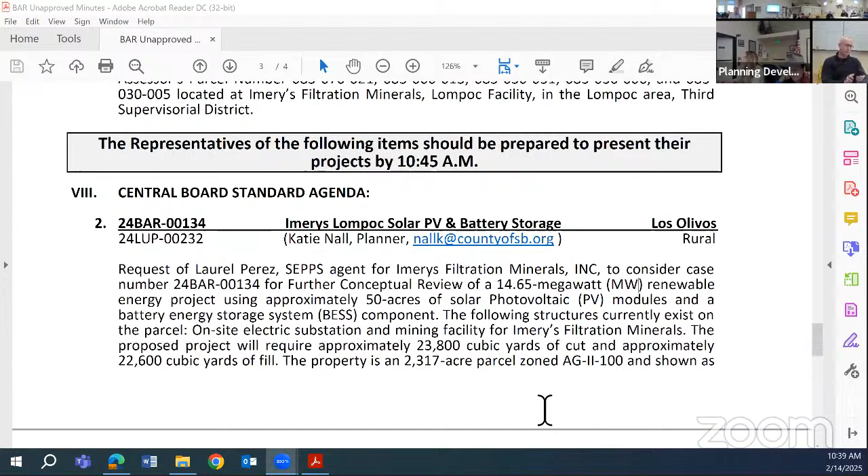Do we have any member of the public who wishes to address the board regarding an item that is not on today's agenda? Not seeing any public comment, and no public comment online.

Okay, any recusals today?

Agenda status report: there was a little change on the agenda for item number 1, which was the site visit, item number 2. It's listed as Los Olivos, and it should be corrected as Lompoc, so make that correction.

Madam Chair, would you announce why we're late? Most of us have been here since 9 o'clock trying to get these meetings going. The site visit was our first item on the agenda, at 9 a.m. We're convening here now because we've just returned to the hearing room, and the first item is also the same as our site visit, which is time certain for 10:45. So that's why we're doing it this way.

Did we need to massage the order of any of the items? Oh yes, we did have a request for item number 4 to be heard before 12 p.m. or after 1 p.m. They have a conflict, so they would like to be heard before or after 1.

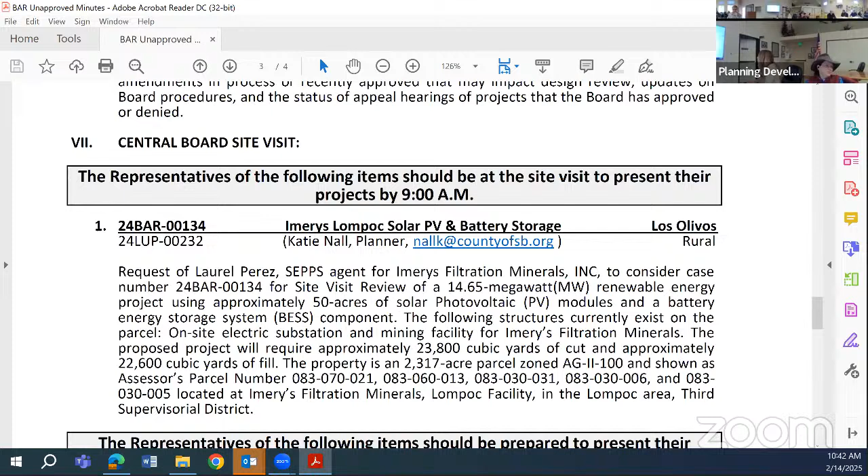Okay, that's my nag. All right, so staff update, do we have anything, staff?

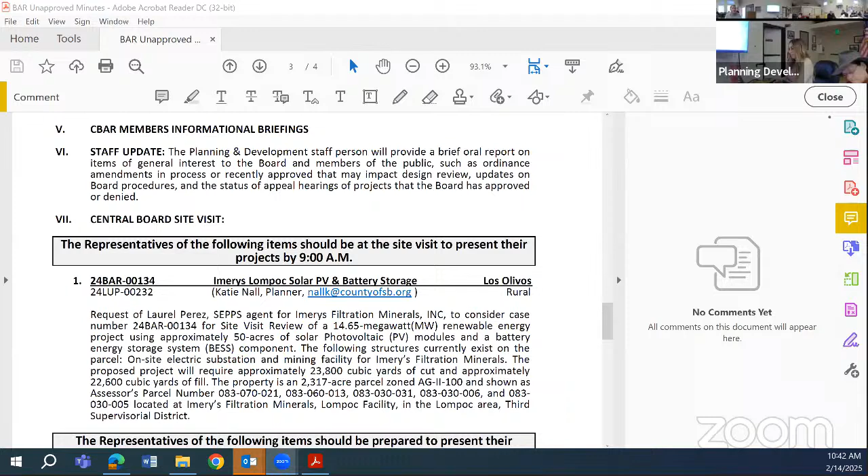Good morning, this is Chris, I am subbing in for Nicole today. Happy Valentine's Day, everyone. The only update I have is that a project was recently heard at the zoning administrator. It was the Seaside Residence and Habitat Restoration Project in Gaviota. I wanted to bring that to your attention since it was a project that came before CBAR, and it is likely to get appealed, which would send it to the Planning Commission. That's it.

Okey dokey. All right, well, I'm gonna very slowly call the next 2 items. Our site visit, which was item number 1, 24-00134, Imerys Lompoc Solar PV and Battery Storage. We did make that site visit, and we actually had 2 members of the public. It was nice.

So that leads us to, very slowly, item number 2, 24-00134, Imerys Lompoc Solar PV and Battery Storage. Do we have anybody online for this? I don't want to call it early, I know it's only 2 minutes, but I don't want to get ahead of ourselves. I think Sally Isaacson may be online, she was at the site. Yes. There she is, okay.

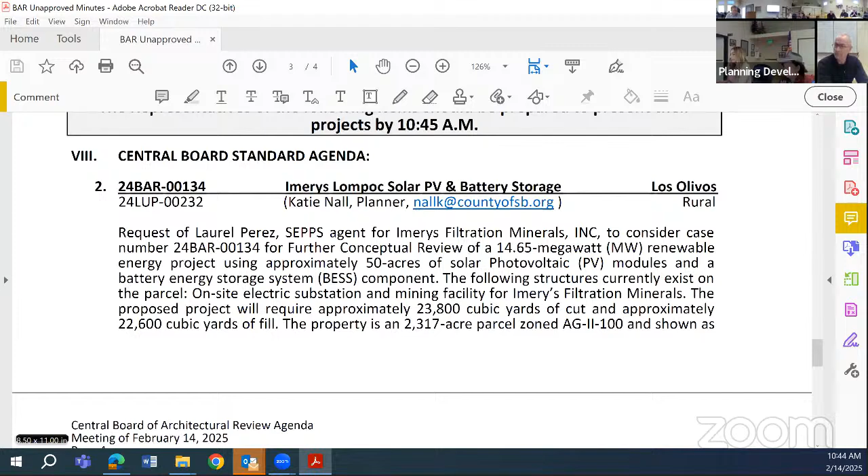I'm gonna go ahead and read, start on the comments, which I'll do first. I don't believe our planner is attending online. So the next thing we're gonna do is I will turn it over to the applicant to have him step up here to the lectern, and we will go through your proposal, your presentation, and then at that point we will see if there's any questions of clarification from the board. After that we'll do public comment, and after that we will go ahead and come back for the board's comments.

Okay, so from last time: this area is a gateway to Lompoc and is an important historic visual scenic corridor. The project site alternatives analysis is difficult to read and lacks detail. Provide a more detailed alternatives analysis that identifies why certain areas are excluded. Create a comprehensive and detailed constraints analysis exhibit, including areas of abandoned mining that could be used for the panels, such as prime solar collection, slopes, sensitive resources, etc. Look at whether there's an opportunity to split the panel location into multiple locations in order to limit the visual impact.

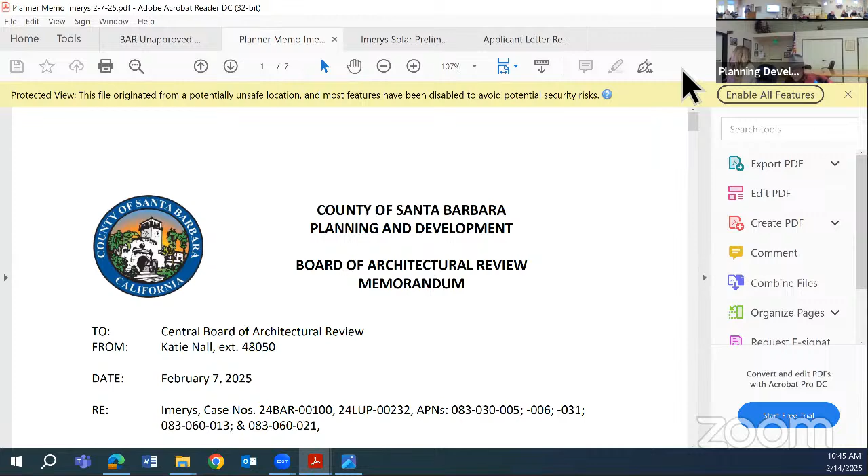It would be best not to place the panels on the highest knoll. A site visit will be necessary for the project. It is anticipated that additional visual simulations will be required.

Provide more details on vegetation that is being removed and vegetation that is proposed to be planted. The history and context of the site, as well as potential restoration areas, should be considered when determining plant selections. Clearly show existing and proposed vegetation and uses.

Strong concern about the poles going over the hillside. Please consider undergrounding the line. Concerned about the chain link fence and how that will integrate with the agrarian nature of the area. There could be more agrarian style fencing that's more appropriate.

Please do not use a V-ditch anywhere on the solar panel sites. We support the replacement of existing vegetation below the panels rather than use of gravel or other material. We are concerned about glare and reflectivity. Please provide more information on how this is being handled, particularly with respect to the view from the road. This item will return for further conceptual review.

We've completed the site visit this morning, so we've got the plans up on the screen. Let's go ahead and take a look.

I'd just like to start off by thanking the board for your time and coming out to visit the site with us. We had prepared a letter response to each of the comments, and as the chair went through and read off the comments, we have little summary responses to each of those. So for the first one, the project is in an area that's a gateway to Lompoc, an important historic visual scenic corridor.

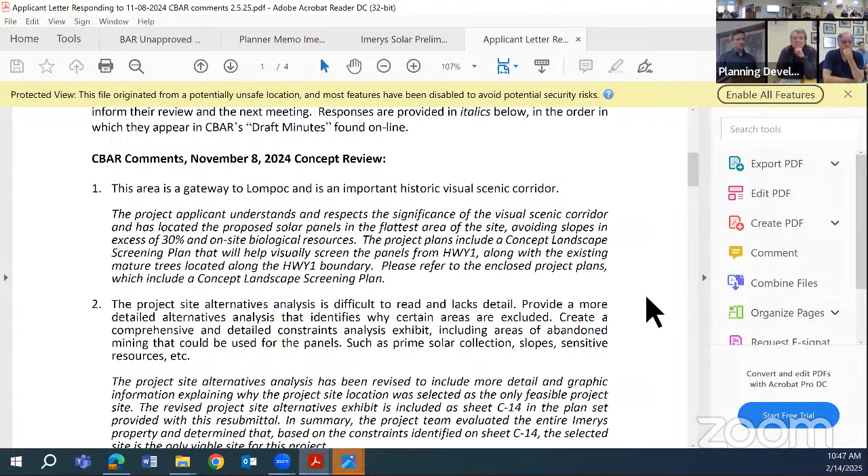The applicant acknowledges the historical significance and the visual scenic corridor. In the layout of the project, we're attempting to get the solar panels down in areas to limit the visual impact as much as we could, and also with the combination of a concept landscape screening plan, hoping to further mitigate those visual impacts. And we'll get to a point where we can take a look at that concept landscape screening plan.

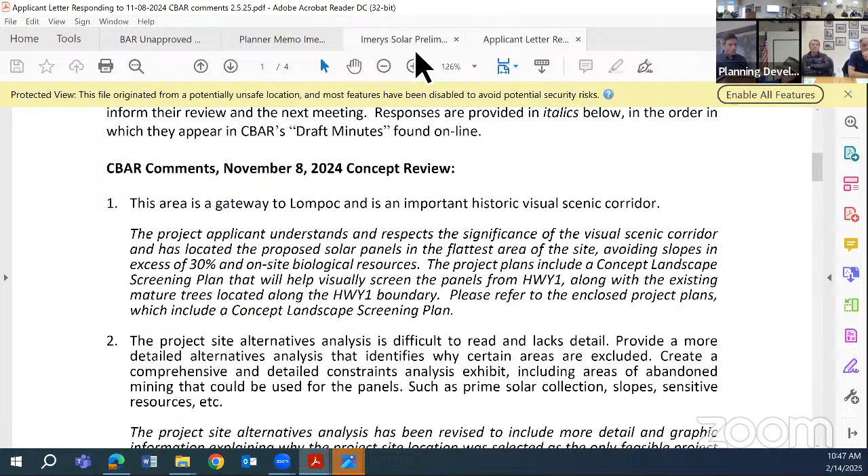Is it possible for you to go through the plans and tell us this information as we're looking at the plans? Sure, yeah, I think that would be a little more efficient.

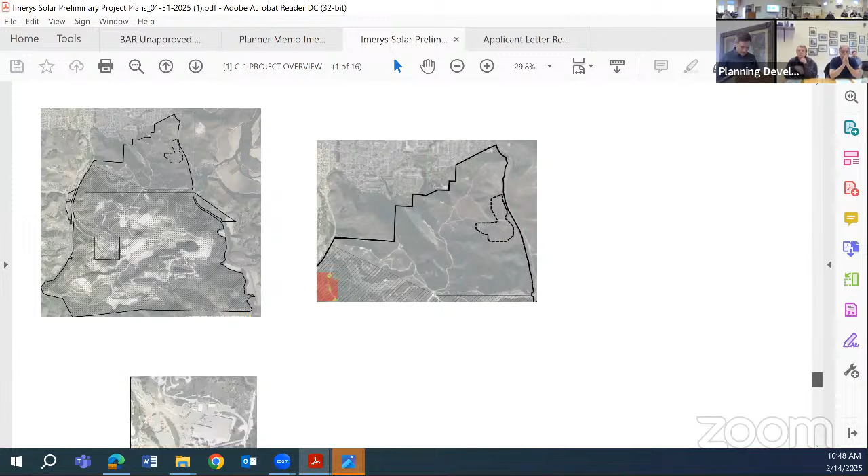Okay, so the concept landscape screening plan, I believe, is the second to last page in the sheet set. It's sheet C15. This is something that we put together to address some concerns over the visual impact and also to address some of the vegetation that's being planted.

So on the bottom of the sheet is east. On the eastern edge of the site that borders the highway, we are planning on planting a combination of trees and shrubs in locations that we feel would provide some mitigation to that visual impact. The trees and shrubs are intended to be of native variety.

We do have a plant palette, just example plants, on the next sheet, so you can see some of the things that were considered for that. In the upper right-hand corner are the items for screening, and some of the trees there.

We have other types of plants shown on here that would be intended to be used for other purposes, such as biological restoration and erosion control, down on the lower left. The erosion control would primarily be used anywhere the site needs to be disturbed or graded for the installation of panels.

So back to the comment about not putting gravel underneath the panels, the intent was not to do that. It was to revegetate with a native plant seed mix.

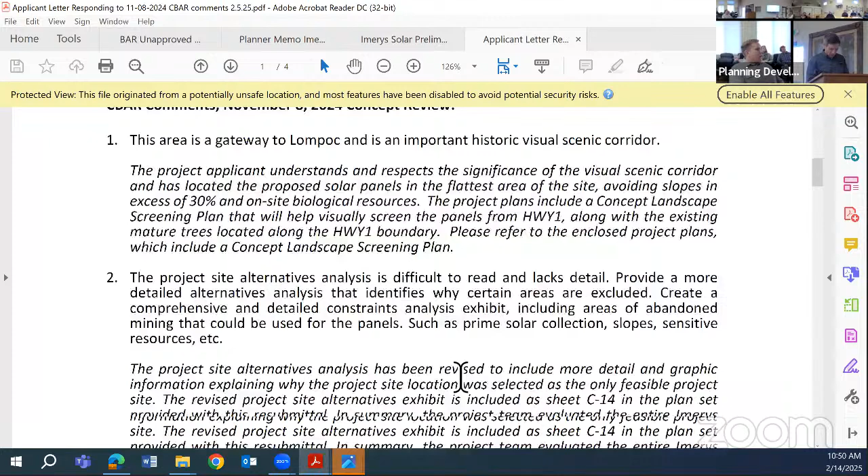Moving on to the second comment, about the project site alternatives analysis being difficult to read and understand. We revamped that a little bit and actually put it as a sheet in this plan set. If you want to look at that, I think that was sheet C14, right here.

So what we were trying to convey with this sheet was to demonstrate that even though Imerys owns a pretty large area of land, most of it is unavailable for this project due to existing mining uses. There was some consideration of putting rooftop solar and carports down in the main operational area; however, you just don't achieve the same scale to make it work economically.

So that sort of put us in the northern third of the project area, which, if you look, there are some blow-ups there, and the colorized pattern is a heat map of slopes.

The desired project site is on the right-hand side of that blow-up. Green colors are the lower slopes, yellow is getting steeper, and red represents areas of 30% slope or higher, where development really shouldn't occur. Most of the land is that red, orange, steep slope area not conducive to development or solar. The lower right-hand image is a blow-up of the solar site, further demonstrating that once you consider biological constraints and setbacks from riparian zones, we're locked into that area we were looking at.

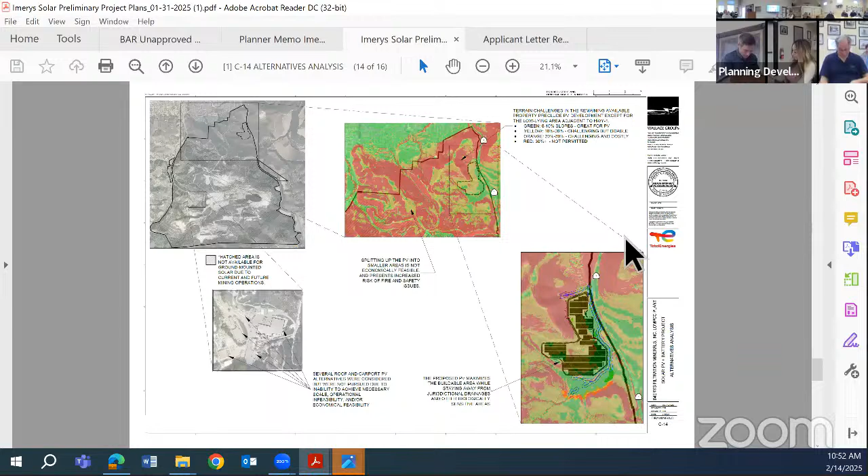Item 4: it would be best not to place panels on the highest knoll. To respond to this, I did a street view screenshot with the extent of the project disturbance area overlaid with a red line, to demonstrate that we weren't planning on putting panels on the highest knoll. It does extend up the hillside a bit, as we saw this morning, but definitely not on the highest knolls - lower area. A site visit will be necessary, and additional visual simulations are anticipated. We accomplished the site visit this morning, thank you again for that, and we'll accept any feedback on the visual simulations we need to see.

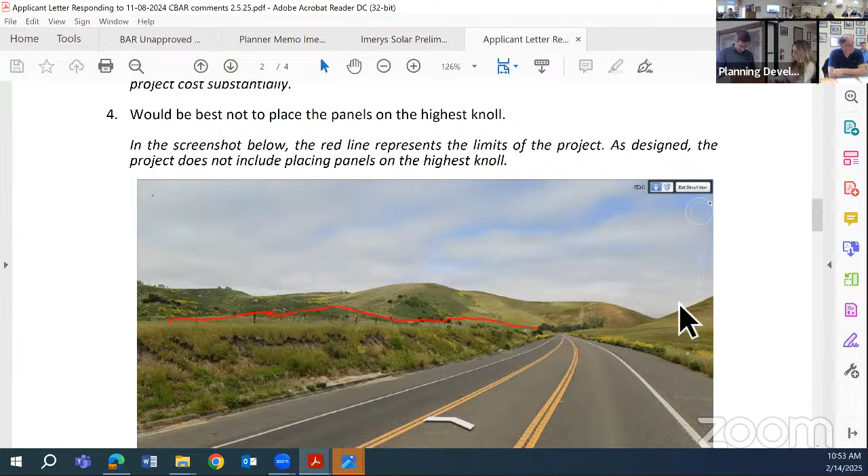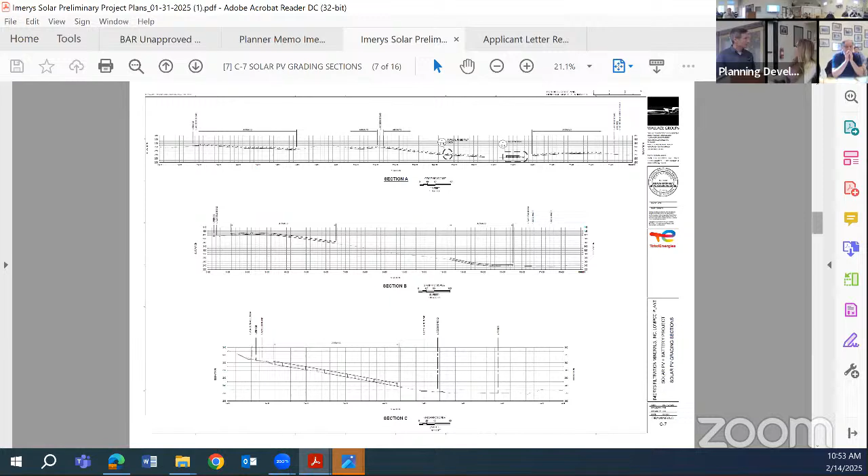Comment 6: provide more details on vegetation being removed and vegetation proposed to be planted. If you flip to the plans, back on C3 earlier in the set, I updated that tree removal plan because the prior iteration had missed an area of eucalyptus trees that we were planning to remove. I updated this layout to reflect all of the trees anticipated to be removed. This addresses trees, but doesn't address some of the shrub and grassland that will be disturbed and removed for installation of the panels. As you look up that hillside, the scrub brush where panels will be installed would be stripped down to install them, then revegetated with a local or native seed mix.

Comment number 7: strong concern about poles going over the hillside, consider undergrounding the line. The intent of the gen tie line was to use overhead conventional wood power poles, not the big steel poles being used elsewhere on the property for PG&E and Strauss. Our proposal is still to stick with the overhead lines. We think the visual impact of those wood poles won't be as significant, and there are also some risks associated with undergrounding - trenching up through the hillsides introduces biological impacts we would need to consider.

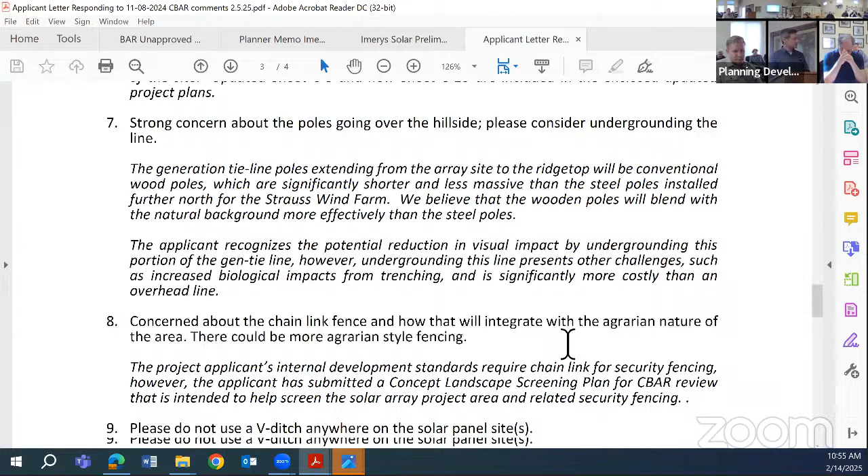The next comment concerned the chain link fence and how that would integrate with the agrarian nature of the site. The developer has some standards as far as how to protect their sites, so the chain link fence is something we're not really able to get away from, but we're thinking that with the screening plan, some of the proposed vegetation would mitigate some of the visual impacts from a chain link perimeter security fence.

Regarding the comment about V ditches - yes, we weren't planning on using any concrete V ditches for drainage. And we support replacing the vegetation below the panels rather than gravel. I addressed that; we are planning to revegetate with native low-growing vegetation.

Then, concerns about glare and reflectivity. We did a glare study in accordance with what is typically done on FAA projects and found that the glare is fairly minimal. Given that it's focused mostly on the panels themselves, we do recognize there is some potential for glare from the metal racking systems. The material typically used for that equipment is galvanized steel, which can tend to become more dull over time as it ages.

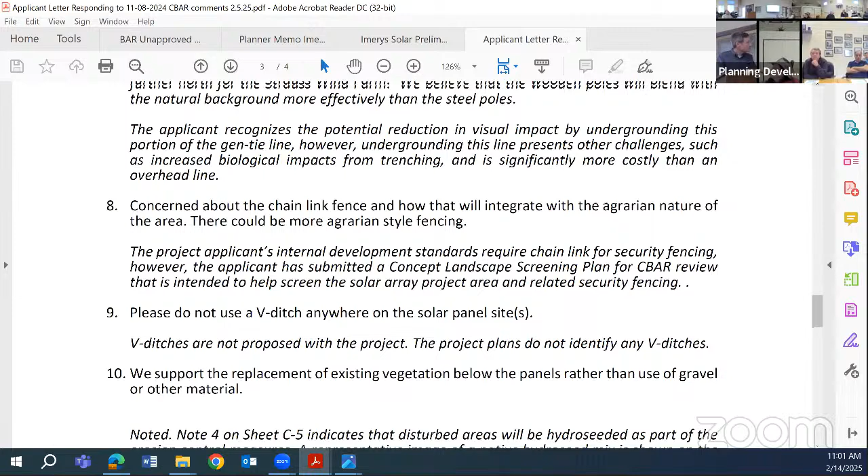Right, so I don't think your landscape plan's going to deal with what we see from the top of that little knoll there too, the red line. Is there any opportunity to add additional screening in the array of panels that would help mitigate further up the hill? There could be, and yeah, I agree that those panels up there, sort of the uppermost portion of that red line, are fairly high elevation, so just planting trees down lower isn't necessarily going to help mitigate all of the visual impact there.

We can look at planting additional trees maybe along this portion of the highway, which I think is a little bit further south from the site, but we can take another look at that. I think planting trees within the arrays themselves, though there may be some opportunity, since we're not putting arrays everywhere, does introduce some concerns with shading. So you can't get trees too close to them, but there could be some opportunities to expand the planting to help address some of those issues.

Yeah, 'cause this is only part of the site. Correct, you have the berm from the road side. Yeah, the berm is blocked further north—there is no berm, so. Agreed, yeah, and as you move further north on the road in street view, it kind of opens up and you can see more of the low lying elevations. Yeah, and that's where we were focusing a lot of the planting, where the berm kind of drops away, so we're concentrating our screening efforts there.

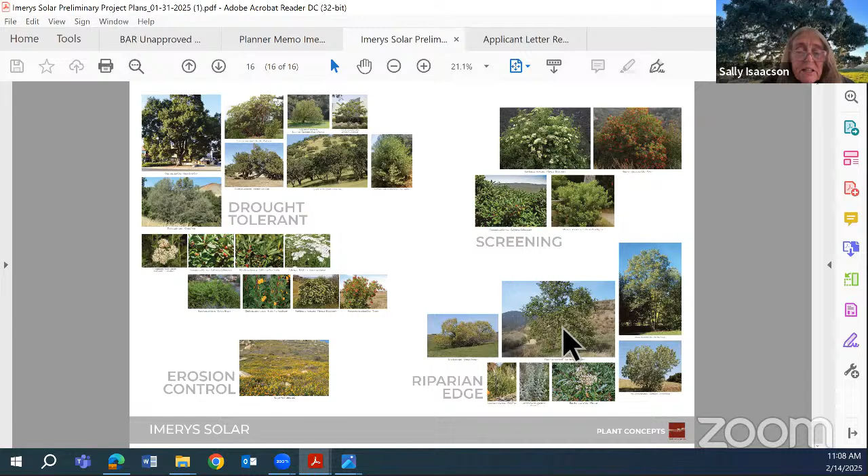But the main thing is we really do not want any visual intrusions along the scenic highway, and the scenic highway starts at 101 and ends at 246. We feel that since the property is over 2,000 acres, and you guys are used to driving big machines and probably own lots of big machines, there must be a way of making some of the topography suitable. A lot of the mine has already been torn up, Miguelito Canyon is already torn up. So why does it have to go along the scenic highway? You can't keep the whole place open just because you might mine it in the next 100 years.

Anyway, so that's a random selection of comments, but the main problem is siting this type of visual intrusion along the scenic highway. Thank you.

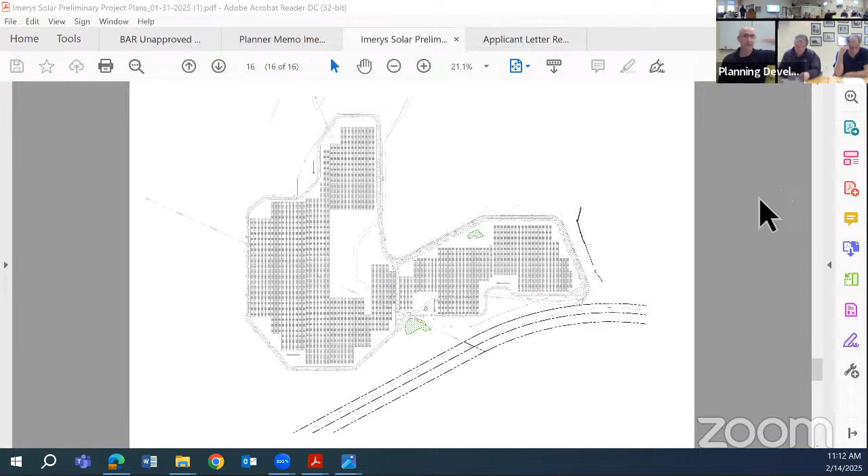And my third and final comment is, I would at least quadruple the trees, at least. I don't want to talk about the height of it, well, I'm sure one of my other colleagues will talk about how high it goes up. If it was cut halfway down, I think you would have a better chance of moving forward. Thank you.

Next? I think I've made my comments on the landscape, I think more is more is better, but I need to understand the point is more appropriate, and by more appropriate, you mean something for the area, more endemic to the area? Yes, good word, okay.

So keep with the native, but just look at things that are more specific to that area, that are gonna work. That was a good catch of Sally's, the gray pine, she's absolutely spot on about that. The madrone would also fall into that category.

And then you'll just have to keep going through the list, but yeah, I think as far as the landscape, there's a real big challenge. Usually when we're dealing with a building, we say the building has to stand on its own visually, it has to meet all of our requirements and findings, because landscape dies. And once it's gone, what are we left with? We're left with this structure, whatever it is.

And so then we start getting into color and breaking up your massing, and a lot of those are, the panels come as the panels come. So when we are facing a project like this where we can't adjust color, we can't do those kinds of things, it makes your job a lot more difficult, but it makes ours a lot more difficult too, because trying to find that nexus point where everything works, that nexus is a lot smaller.

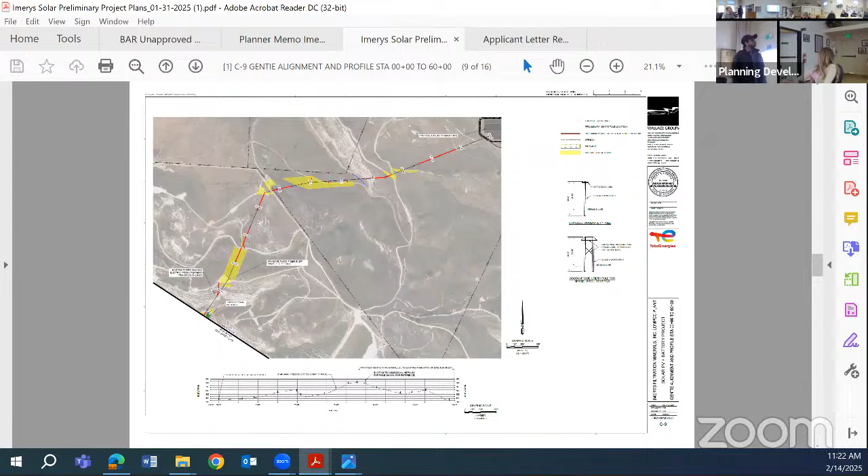And I was pleasantly surprised that when you're at the top where it flattens out again, yes, you get that angle of repose. But there's that band from contour 325 to 355 maybe, where it kind of swoops around there, in between the top flatter part and the lower parts. Just about where the cursor is, but to the left, and down, down to left, down, that band there.

I think it'd be appreciated and go a long way if you could study that with a little bit more scrutiny. Maybe even it's a 2-for-1 where you find a new home for a select number of panels there and replace it with some more screening for the upper ones or something. Whatever you can do there would be appreciated. Okay, take a look at it.

So, yeah, don't limit yourself to just perimeter screening. Take a hard look at where you can put things within the site, specifically that center area, kind of where that red... We're not planning on putting arrays there. Where you're not gonna be putting arrays, right, you may be able to get some shrubs in there or something else that will visually screen from a southern view or even a north view.

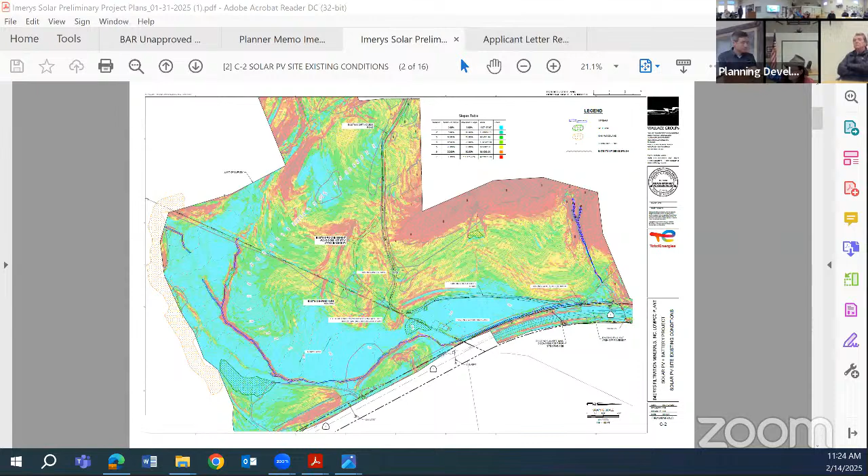But those are the two things. And I think you can see the northern end, where it's up on that slope. I think you can see that from further down one, down towards where the double lane is, passing lane. I think you can see it crowns up above, and it's probably not as visible from Santa Rosa, but on one, that's more visible from a distance. Oh yeah, so you're heading from the south to the north. Northbound, yeah. Because the hill on the south side here doesn't— it's this area, this is just peeking up a lot.

But you get a straight on view, which is very important to us. I mean, granted, most of the cars driving on our roads today, most often, or a high portion of the time, you have the driver who really, let's face it, is trying to focus on the road. But if you put a solar array right in front of me as I'm looking down the road, I'm gonna see it and I'm gonna notice it. And that is a very big view. Not to say that we don't discount those poor sods whose partner always drives and they have to look out the window, right, so we have those as well. So we are looking at— we do look at views and distance is a factor, but so is angle. So those are all things we're gonna be taking into account when I look at it. And I noticed that there was a view of that area.

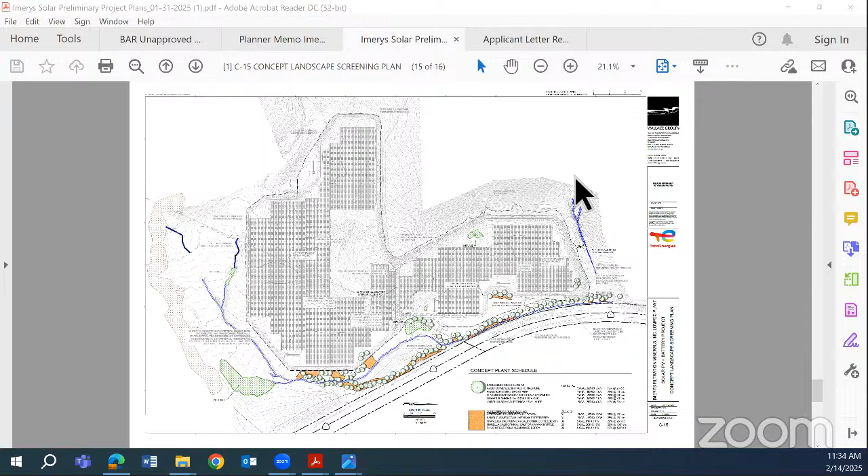Okay, good, does that work? Does that work for you, Katie? Yeah, I'm on board with that. So we'll lock down the consultants, kind of bring them up to speed, come back for another conceptual, and then that's when we'll hunker down to start writing that draft environmental impact report. Sounds like a good plan. Okay, great, thank you, thank you.

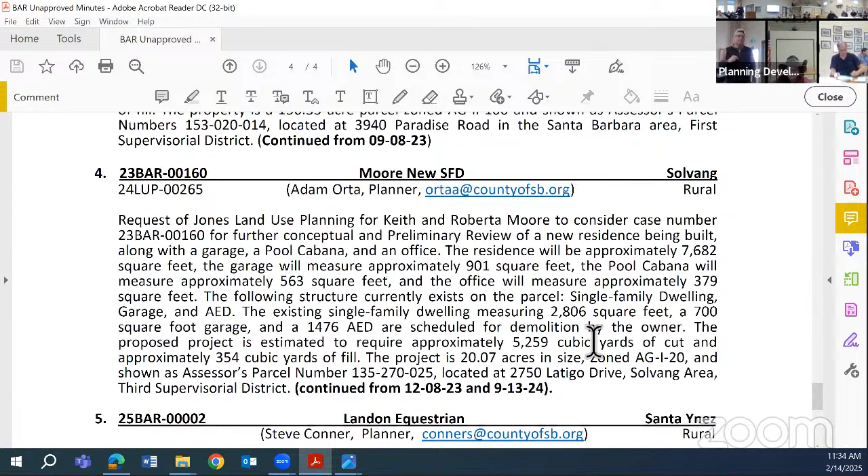Okay, are we accommodating that request to move forward? Yep, that's what we're... I'll make a suggestion since the next 3 are yours, can we go ahead and do 3 and then we'll trail 4 after 5? Yeah, that works, yeah, it works for you. Okay, yeah, okay, thank you. Since they're both your projects, all your projects.

Oh, let me see if we have Jim. I'll read the comments while we get technology in order. Okay, great, a site visit will be required. BAR will work with the applicant on appropriate timing for the installation of story poles. Work with your planner to depict the applicable hillside ridgeline height requirements and demonstrate compliance on the plans. Feedback is limited at this time since the planner has not yet been assigned.

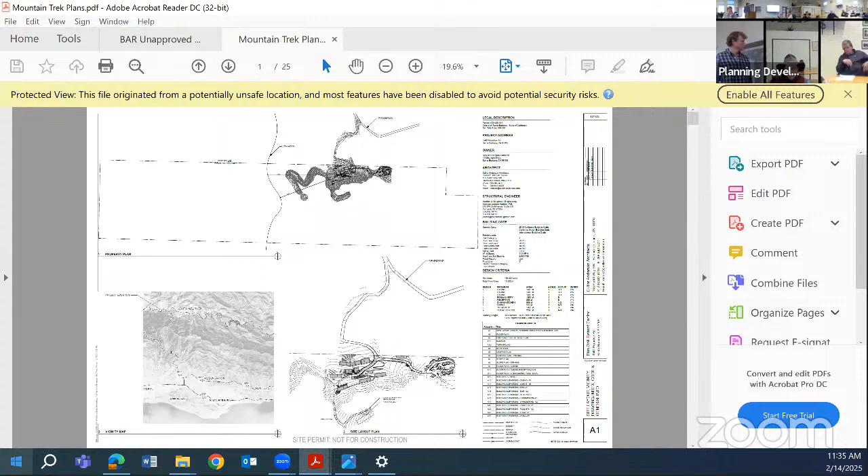You came on your one free pass. So now you have a planner, and, hello, right? Return with a planner memo adjusting for site constraints and resources, if those elements impact the location of buildings.

Did we have a planner memo with this? This is Willow, the planner. Sorry, I didn't draft a memo, but I'm happy to speak to site constraints, and I think there were also comments about the hillside ridgeline restrictions. Sure, Willow, why don't you bring us up to speed and then I'll let the applicant do their presentation.

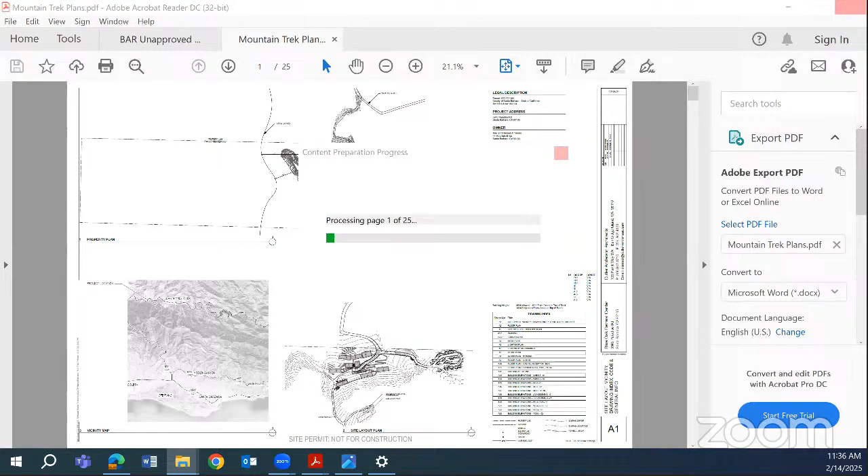Okay, sounds good. So this site is pretty constrained by oak woodland on the site, so the proposed development is to the maximum extent feasible in the location of existing development. They'll be demoing the existing buildings and constructing in those areas, and that's also so they can use the existing driveway. The site is pretty steeply sloped, so using the existing driveway would avoid large amounts of grading for access.

And then with regards to the ridgeline hillside guidelines, the height limit is 16 feet since it's rural, and the proposed buildings are meeting that 16-foot height. And then there's just the other guidelines for materials and colors to be compatible with the terrain, minimize retaining walls, and use landscaping to make sure the development is compatible with existing vegetation. And I can answer any questions. Okay.

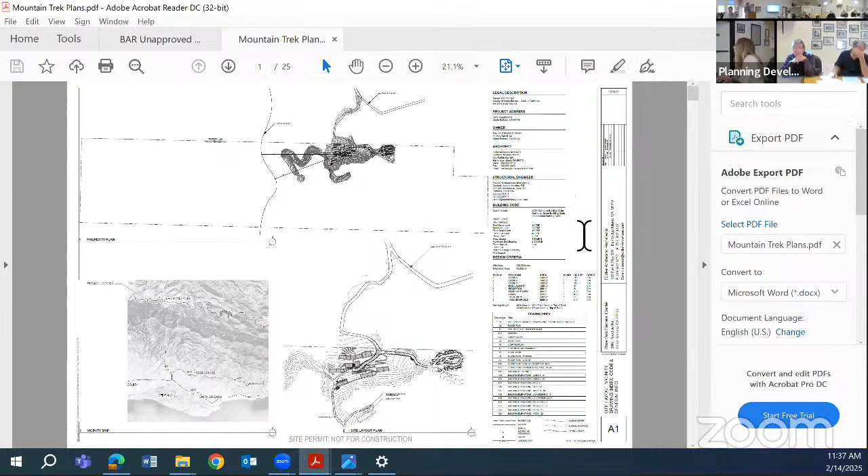Well, go ahead and get us oriented. Do we know if our architect Jim's joined? Would it be okay for me to speak? Yeah, absolutely. Okay, since I don't have control of the screen, can you go to A2?

Great, I can't point, so I'll use words to describe what we're seeing. My name's Jim Cutler, an architect, and I'll briefly reapprise you of where this is. It's on Paradise Road, several hundred meters, maybe 3/4 of a mile, west of Rancho Oso. The land is 156 acres, accessed through the National Forest land with an easement road for access.

The use is intended to be a wellness and hiking retreat, not a resort. The facility is intended to house 18 guests in 3 buildings. Those are the 3 groups that have 6 rooms each.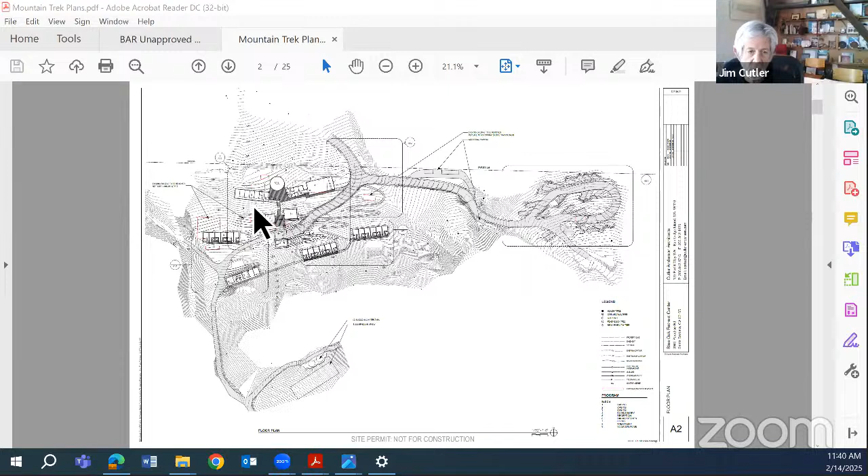Directly on axis with that, the round thing is a swimming pool, which will frankly be a galvanized water storage tank. Finally, at the very bottom of the drawing on the left is a maintenance facility and offices and a battery storage area.

The project is off-grid, and consequently we have a 150 kilowatt solar array, near the top of the small rise in the existing cleared area. Move your cursor there to the rectangle, it says solar array 2000. Yep, there's a solar array placed there.

No trees will be cut down for that, nor is it visible from anywhere below, though it would be visible from birds or someone higher up on the slope. All of the roads on the property are existing roads, improved and regraded in some places to comply with requirements of the fire marshal, with whom we've met multiple times to stay in sync.

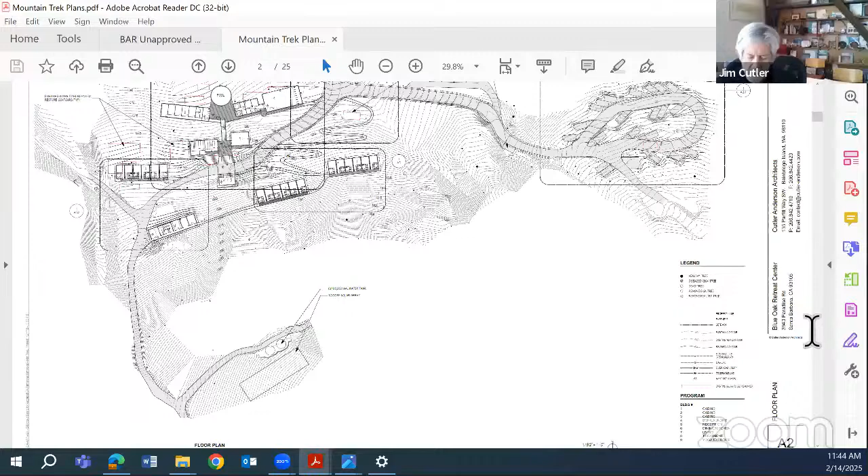Let's scroll down to A10 so we have some visuals on how it's working. These are all the required drawings, we don't need to go through those. You can blow it up to get detail.

Maybe I'm wrong, maybe it's farther down. Keep going down the group. There are some rendered cross sections, keep going down. There you go, back up a bit.

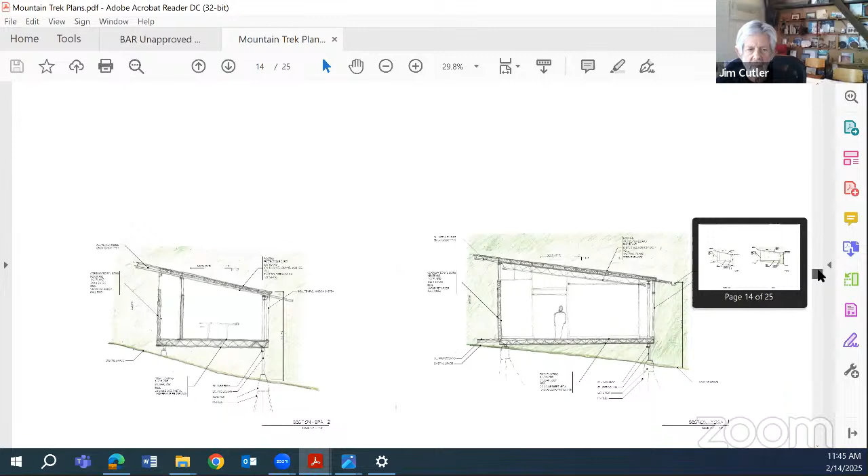As you can see, this goes back to comments from the last hearing. We originally had tipped all the roofs up in the opposite direction so we could use the roofs for solar arrays. There was clearly an objection to being above the height limitation, so we put in a solar array up the hill in an already clear area and tipped all the roofs down so they met all the height restrictions. These are two of the buildings.

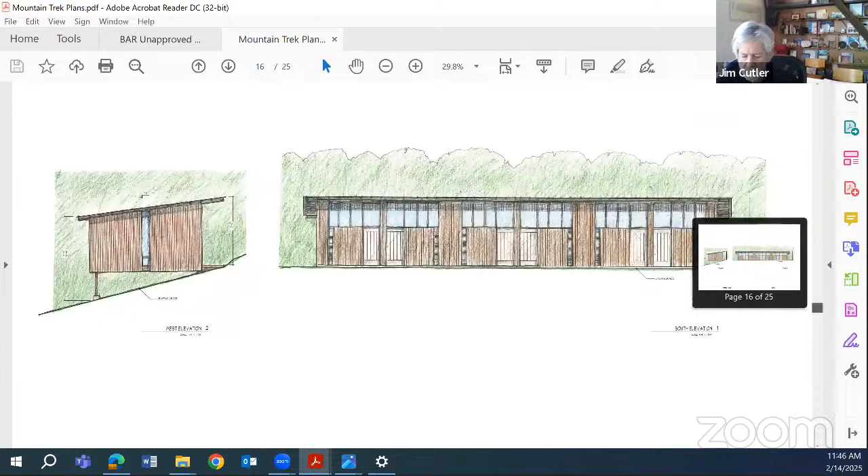Let's keep going down. We'll get to some sections. There we go, this is the gear building. It's the only one we've tipped up because it's tiny, 12 foot 6 inches for the height. Keep going down.

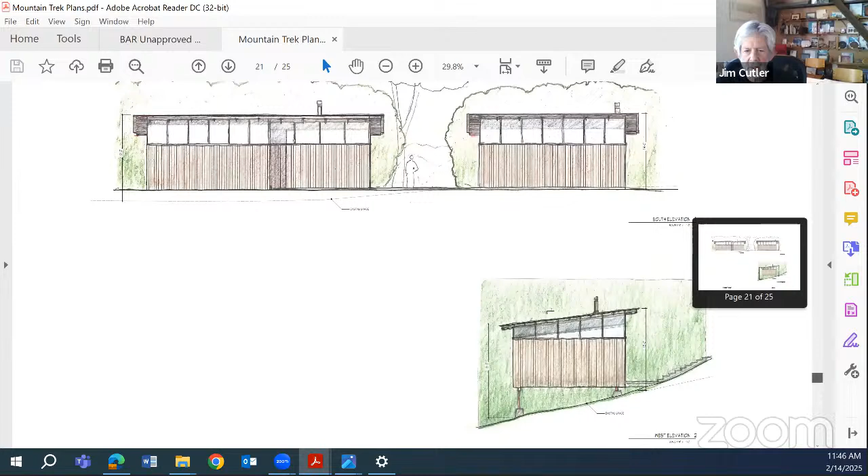There are those yoga buildings. Keep going down, there are a couple of sections. That one gives some sense of the construction of the building. The lower drawing, the building on the left, is the dining, two dining tables. The staircase is all metal, the decks are all metal. The building below is the spa building, and you can see the galvanized water tank for our swimming pool.

Go down one more, or two more, I think. Keep going down. So in any case, you can see these buildings are all wood siding. Keep going down. I have a much shorter presentation to you than last time, since I was told I couldn't present from my drawings.

Anyhow, this is the opposite direction, showing the small lounge building in the upper area and access to a sauna and steam room, and farther behind that, a yoga studio. So I think that comes quite close to the end. Let's see what we've got at the very bottom here. Yeah, that's it, so that's the visual and verbal description of the project.

Willow recommended that I bring photos of the public view so you can see what visual impact this might have on the public. We didn't submit them in time to be part of this, but I have them, so I'll pass them around.

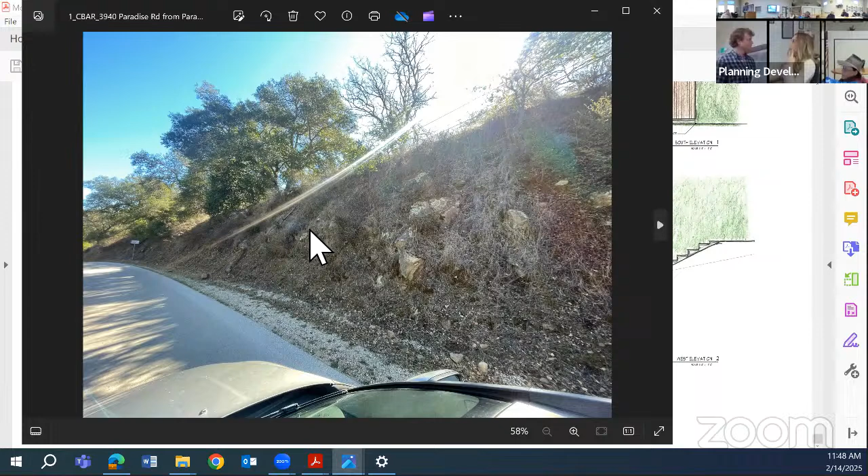There's 7 photos, and they're along the public road. This is public Paradise Road.

It then peels off, so if you go to the next photo, that's now becoming private Paradise Road, which is causing some confusion with the county, but that is effectively Rancho Oso's private driveway. We have a shared agreement for the beginning of that.

This is still some quarter mile north of our property. This is as soon as you turn on, and this is up the road, where our driveway starts. We peel off to the right. Again, this is our easement through the forest, so our property line is still a good couple hundred yards uphill from this.

Technically, guests of either Rancho Oso or ours are the ones permitted on that road. Next one, this is going back up towards Rancho Oso, and this to me kind of says it all about visuals, as mentioned, there are existing ranch structures. The tallest is a barn that houses a tractor, with a shipping container under it. I measured it at 18 feet. We're proposing a maximum of 16 feet, and you literally can't see any of this stuff. If you go to the next photo, you'll see what's hiding underneath these 50-foot valley oaks and blue oaks and coast live oaks - that's an 18-foot ranch structure.

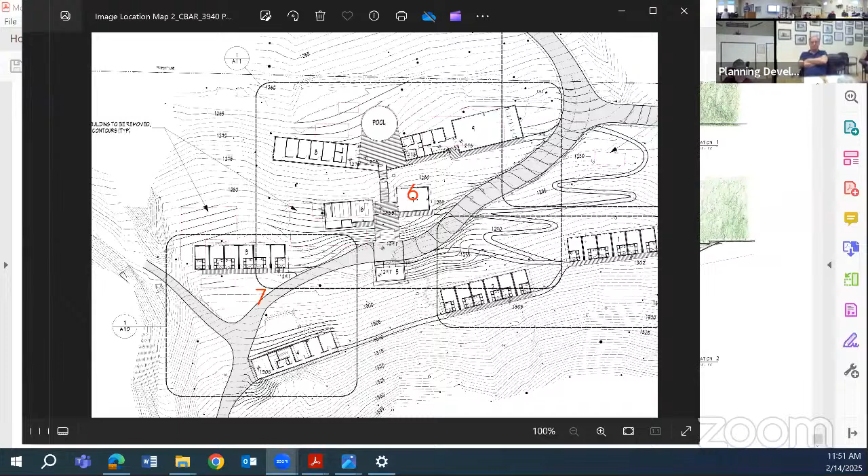You don't have anything to add? Okay, Alex, I was just gonna mention the landscape plan. I think it's in the set, if you can go back, the last 2 or 3 sheets. So as Jim mentioned, we are slated to take out 8 healthy trees, predominantly for widening the road for fire code. There's lighting in here, but I didn't see any landscape. Maybe the appended landscape didn't come through, but I can summarize it, it's pretty straightforward.

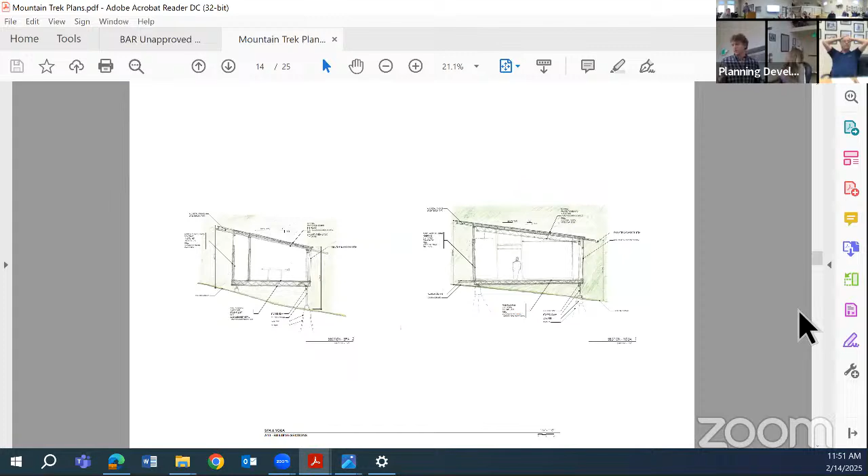We're trying to support native plantings, and we have a tree mitigation strategy proposing planting 65 trees, a good handful of which my kids and I have already planted to get a head start. So 13 trees are proposed for removal, a range of coast live oak, absolutely zero valley or blue oak. We designed around those with the strictest standards, and then 2 scrub oaks.

So we are planting a mix. We did a biologist report with Larry Hunt. We are proposing a 5-to-1 replanting ratio and a mix of scrub oaks as well as coast live oaks, blue oaks, and valley oaks, to support diversity of the tree species.

So of the 13 trees, 5 have been deemed unhealthy and not going to survive by an arborist, so there's only 8 healthy trees we're talking about. Right, we had Duke McPherson come out and we did a full assessment. We had already surveyed every single tree before we started designing, because we knew from the beginning the design intent was to work in harmony with the forest.

And then for aesthetic plantings, it's all native, trying to restore native grasses. This parcel, to the best of my knowledge, has once been grazed, and so they put in invasive rye and other grasses, so we want to try and plant and support native grasses. So the entire ethos of this project is to be nature emergent, to help people heal in nature, and to do that with all native species, respecting the forest and the healing powers of the forest.

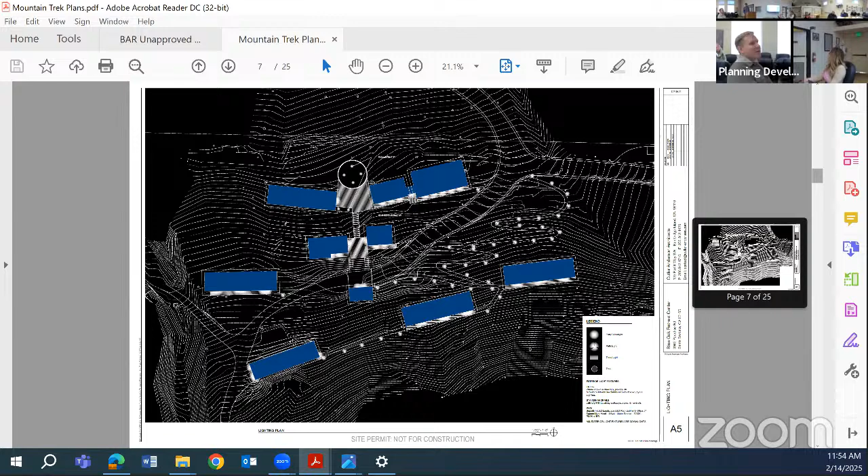Could you talk about the fire resistant materials and the general materials you're proposing to use on the structures? It seemed like corrugated metal, but the way it was sketched, it kind of looks like wood siding on some of them. Yeah, I'll answer this one. It'll probably be... hello? Yes, speak loudly. Oh, I'm sorry.

Okay, the materials right now are either going to be corrugated or snap lock. More likely than not, Cor-Ten if we can afford it, because it's 22 gauge and it's more heat resistant than the 24 gauge standard baked enamel, and the baked enamel can burn. So we're thinking it's going to be Cor-Ten. The roofs are going to be Cor-Ten, which, if you don't know, is a metal that will rust and then it stops rusting.

We have discovered over the years that it has a really good tendency to fit in relatively invisibly. Obviously the windows are glass. The decks at this point are anodized aluminum decking. All the structure is steel. The undersides of the buildings that will be insulated will have, again, Cor-Ten sheet steel on the underside.

We feel strongly in our firm that you build things based on not style, but on tangible reality. And the tangible reality of your climate is that at some point, some things are going to burn. We ought to, from day one, let the nature of that ecosystem be described by the way we do the building. Building should respond to the nature of the place, and therefore amplify its nature. So that's what we're doing.

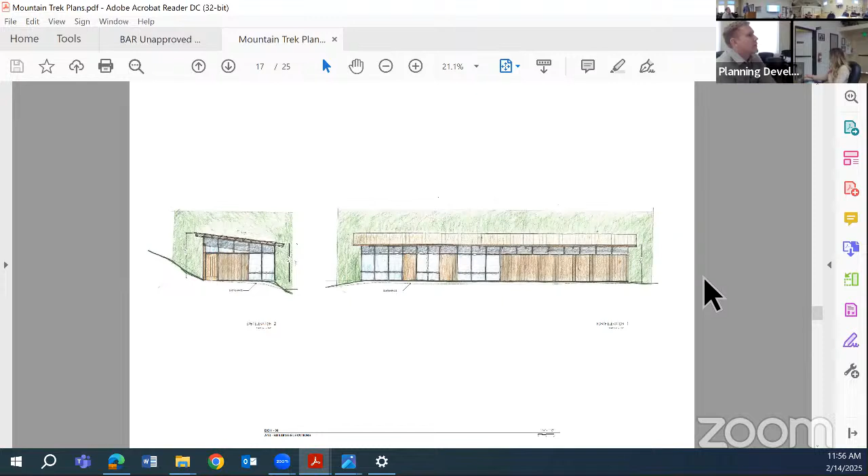Are you anywhere near Snyder Trail or Arroyo Burro? Snyder goes through the property, actually. Can you point it out on that satellite image? It's west of those. You can see it from A1, on the first sheet. Given the topography, you can see pretty much the whole valley from Snyder, so you can certainly see this property. From Snyder you cannot see any of the existing structures, but you would certainly see the solar, right?

Which part of that do you want to look at? For showing Snyder, if you go up to the top it'll be easier. This is Lewis Canyon, so that defines the eastern side of Snyder Ridge. Snyder Ridge is going to be west of that canyon. Got it, okay, thanks for the context.

Last question, I know I'm taking up a lot of time - the trees, I know they're well surveyed. If you were to transpose a canopy boundary or something over your site plan, would it just blur out the whole thing, or critical root zones?

We did a full arbor report, Willow has it. We did it with Duke, full critical root zone mapping, and that's how we came up with our mitigation number, based off of encroachment. As you noticed, pretty much all of the foundations, except for buildings specifically outside of a critical root zone, are pin pile. So we are trying to minimize damage to the roots, and as Duke has instructed us, you can locate those foundations and avoid critical roots.

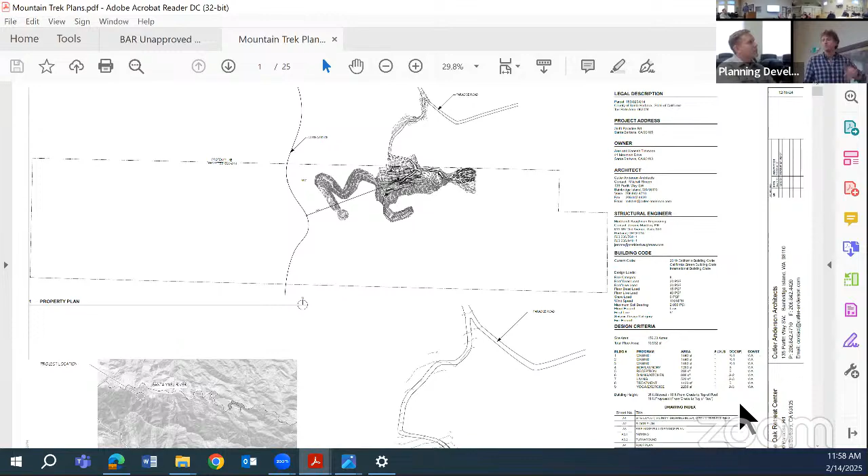In our planting, we've also proposed in the arbor report a planting location very specifically chosen - me and Duke walking around to fill in the exposed areas, because as we're learning about this forest, it is the openings that are destroying it. The sun is then allowed in and burns the south-facing trunks. So in order for us to champion the health of this forest, we want to also place buildings in those openings to act as shade, but also plants such that canopies fill in any openings in the canopy.

Anybody else? Is there a well? Are you on well water? No, we would be proposing to dig one.

Can we go to any of the pages with either sections or elevations? Yeah, go to the first section sheet. You need to zoom out. Well, actually, no, you don't. Scroll down a little. This one's not gonna work. Go down a little more. That one on the bottom, right there. That west elevation, that'll work really great.

Okay, so the way the hillside ridgeline calculation is done - I'm gonna have to stand up, so you're gonna have to adjust your point. So what you do is, this is your grade, existing grade. You take that and project it 16 feet in the air, and your building has to fit below that.

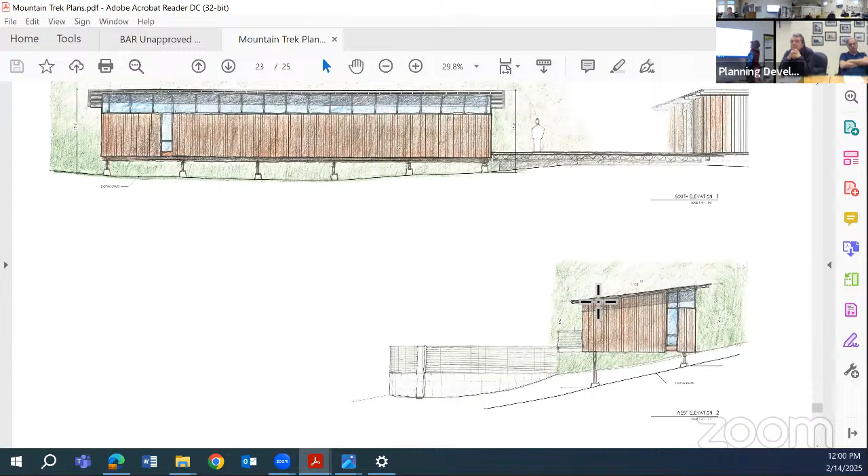I can see these dimension lines are drawn in the wrong place. If you put a scale on these drawings, if you come straight down from the eave, it's 16 feet. Well, let me just finish what I'm saying - to prove compliance, the dimensions are great, that works great, but to prove compliance what you need to show is that line up here. And that's true for all of them. You can scroll down, go to the next one.

And it's helpful when you do have these dimension lines, because that really kind of sets it for us. But even here, you should be showing - if this is a cut for your pool or whatever that is, if that's cut, you need to show existing where it continues, current, and then you need to show that projection so that you get that all in there. That is how you show compliance, okay?

And it gets really tricky because, of course, it's like your blanket after you've gotten up out of bed and thrown the covers back, it kind of goes like this. So when you do that projection, there's no way to show that orthographically, in a 2D sheet of paper.

You have to suss out those little corners where you may not be getting compliance. Everybody chooses how they show the projection, but when you're on a slope, you have to cut a section or do something different to show you're meeting compliance throughout the building. There are tricky ways to figure it out. I've seen people do nifty 3D stuff on the computer, but that's not necessary—a simple 2D offset demonstration is fine, you just need to show that it complies.

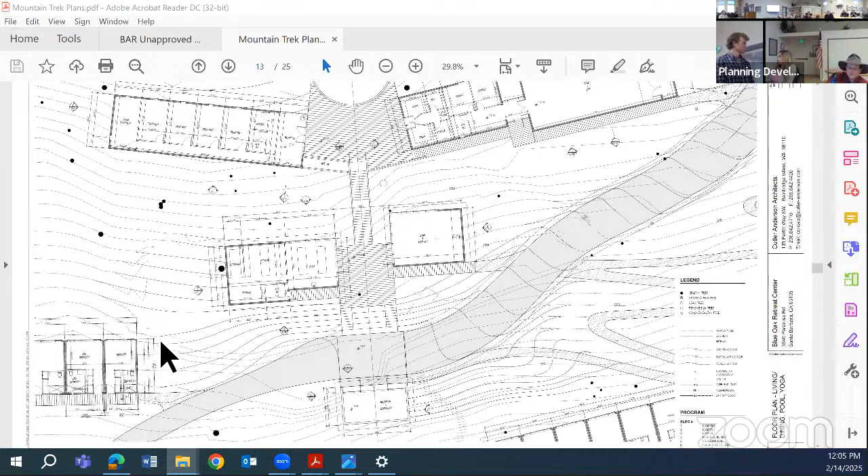Yeah, it's a very exciting project, I'm really looking forward to it. I'd go back to the arborist report—I noticed you've got buildings right up against some of those trees, talking inches, and that's great. A couple of them, the roof lines especially, some of those oaks are real close. It'll be interesting to see how you're working in the critical root zone with your foundations as you move forward. It's an exciting project to me.

Can I make a comment? Well, I'm trying to get my board comments so we can go to the next project, so let me hold off there. Anything else? I'm good with it. I like everything, yeah, I'm good too. Chris, alright, I think you have a lot of support.

We will need to do a site visit. Do we want to do a full board or what? How many—your architect, what's your square footage on buildings, development? 10,932 square feet. You just ticked it—it requires a full site visit.

Where is my site visit? That's why I bring the binder. You mean after 25 years? This one's not that old, this one's only 20 years old. Seriously, these are the original bylaws for the BAR. So, okay, site visit between 3 or more, let's get to that. Commercial.

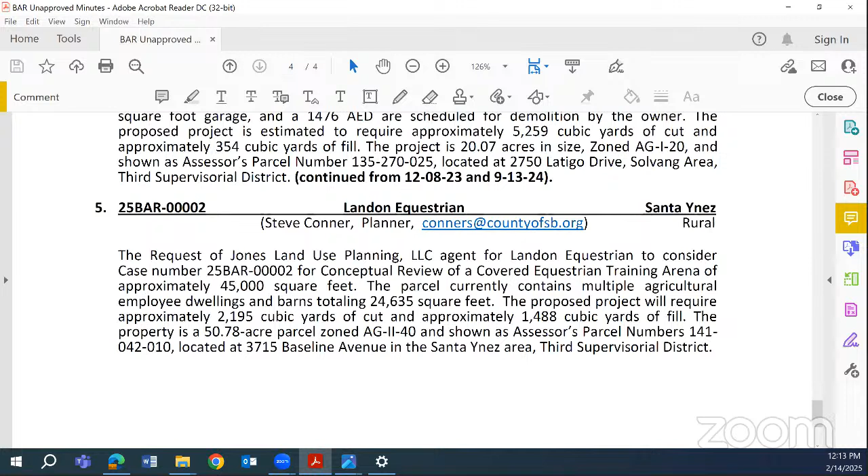Quick clarification, is the project gonna return for further conceptual or prelim? Yes, because the planning commission will need to take an action. We won't agendize it for preliminary, although we are asking the applicant to take it to that level prior to the planning commission. Can we agendize for a combo? No, we don't. We only agendize if we're actually going to take the action. Got it, so it would be further conceptual. Just so members of the public are not confused about what's actually gonna happen, because we can't take that preliminary action. Or I suppose we could, and then we could throw the whole cart and horse and everything into a furrow, but no, we don't do that.

So, okay, so you want me to do item 5? We're gonna skip item number 4 until after we've heard item number 5 because of a scheduling conflict for the applicant. So we're gonna take item number 5, 25 Bar, lots of zeros 2, Landon Equestrian, in Santa Ynez.

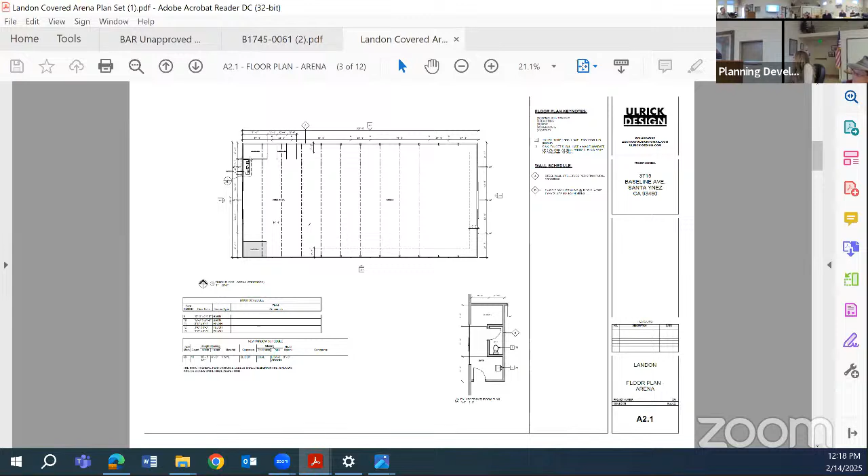Keep going. So we do have details, sprinklers and lighting and all that.

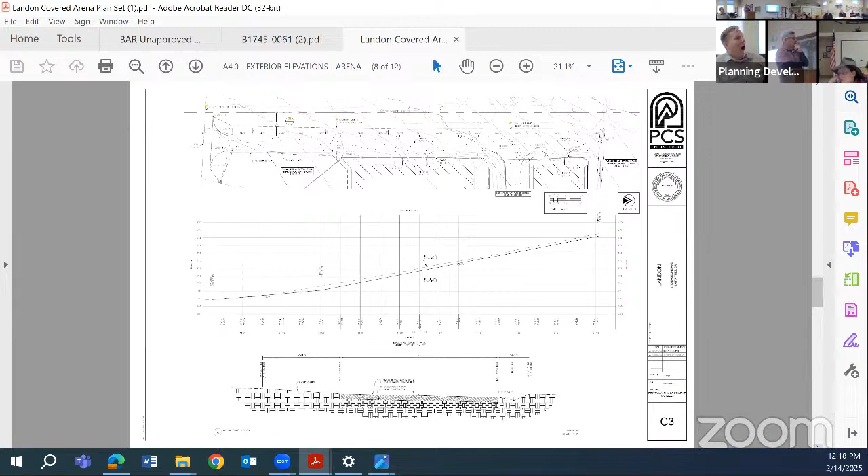Colors. Are you doing a swale? How's that around that one? Yeah, but it's just an earth swale, yeah.

So the grading is completed for this building, and then now we're working, this project is below. So this is the building that you were just talking about having already? Correct, we just got rough grade on it, and the building permit has been issued, we're just getting ready to start the foundation. Right, got it.

Did you say that the owners own more than that 50-acre parcel? Correct, yeah, they own the property directly to the west, which is, I think, 20 acres, that's on North Edison. That fronts North Edison? Correct, yeah. Go back to the first page.

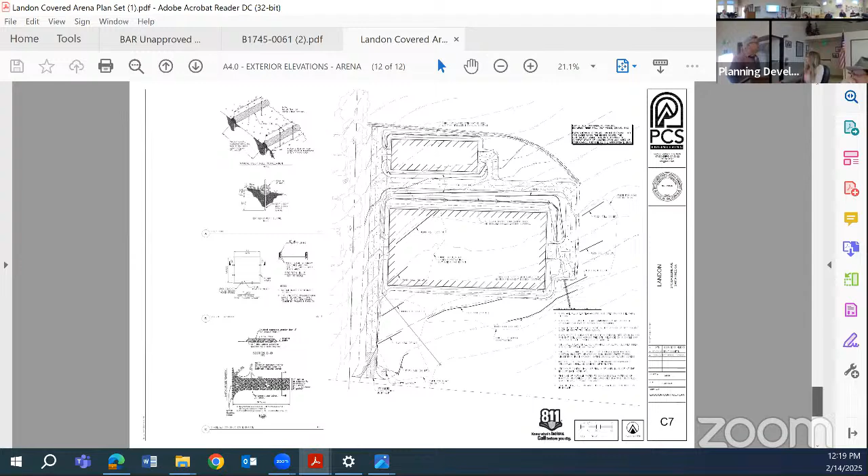So they own this property here, so again, here's Edison, they own that property. But the access is not off of Edison? No, I mean they do use that, but their legal access comes through this parcel with an easement. And where's baseline again on this? Baseline is right there. Okay, so this is north of baseline, right near the corner.

Where's the Olive Grove there? Olive Grove is just to the north. Actually, this property was developed with about 25 acres of olives under previous ownership, and this client, when he purchased it, ripped all the olives out. So they're still to the north. Yeah, interesting, okay.

To the ridge, take it 30 feet to the ridge. 30 feet to the ridge, yeah. Go down to the, and because it's ag, you can go that up. There is no height limit in Ag 2 for an agricultural building.

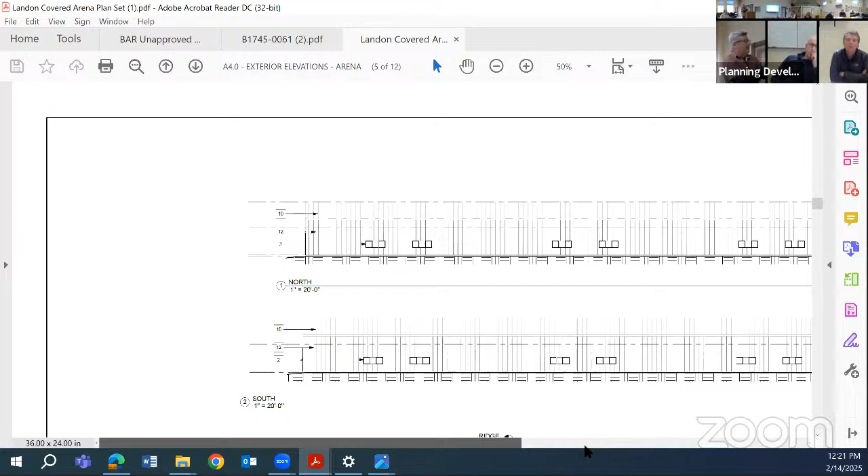There you go, you might wanna zoom in on that. Is there a practical reason why it has to be 30 feet tall? I think it's just the span, because it's so big. And at the edges, to have the horse clearance on the edges is where you're starting from. So what are the dimensions of the building?

Good question. I think we probably need to go back to those, sorry. Go up to one, the floor plan. One, yeah, more, here we go. So that's the roof area, 300 by 150. Yeah, that's what he has on the floor plan. Doubles as a football field, there's two football fields. It's wider than a football field.

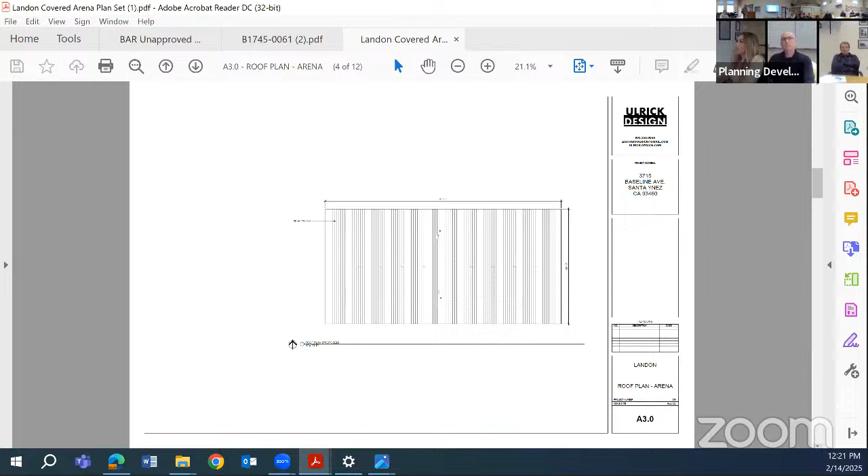Is there parking on site? Yes. Oh, you're just 200 feet. There's a site plan. But it's wider. No, it's 150 by 300. Perfect, thank you. Yeah, well, there's a lot of parking here.

For the existing operations, and then we are proposing parking here, and there is parking for this building, and then you'll see our hammerheads for the fire department.

Yeah, are there events proposed for this? That's an excellent question. We are under the Ag Enterprise Ordinance now, which just got adopted. So typically it's a boarding facility, so visitors will come. So he doesn't have any events, but we are gonna be proposing some events as part of this. A certain number to fall under, there's certain tiers in the AEO that we wanna stay under the zoning clearance portion of that.

And what type of horses did you say? Arabian. Is this where they have the horse trials now, south of baseline? Further down and south, that's Shepherd.

I wonder what those horses did to come on trial.

Sorry. Hey, at least they haven't come before us and accused us of killing their horses. That's happened before.

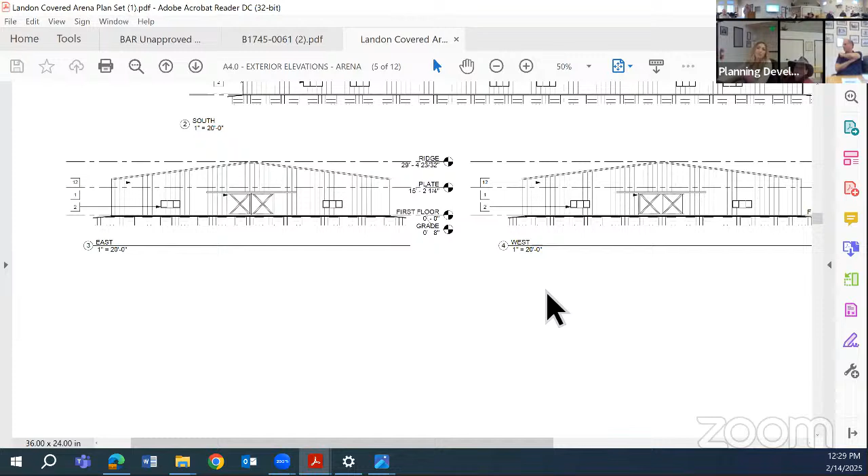Make sure the pole is to the 23/32 of an inch. Certify it, and if you are raising it, take that into calculation, just make sure it's an accurate representation of where the structure will actually wind up.

I don't know how many times I've talked to people and they've put up poles and it's been like... anyway. Okay, I think that's it. That one was pretty quick. I tried to drag it out, but I only got to 12:30. Not a half an hour worth. So is it further? Yeah, return for further conceptual with a site visit.

Although any details you're gonna show us, you can go ahead and throw them in. It's pretty simple on this building. This one also is a PC, so that's about as far as we can go. Yep, that'll be as far as we can go.

Do take pictures for the planning commission when the poles are up, and you might see if the planner wants to come out and check them out too. Is there a landscape plan on this? Does it need one? Well, it's kind of up to us.

I'm reserving judgment on landscaping until we see where the other barn is and what this is and what your circulation path is, that is the one thing I would encourage you to do. Make sure it's very clear what you're treating differently, where that swale is. You're gonna have to do something in the swale, obviously, for erosion, so go ahead and throw that in, might as well.

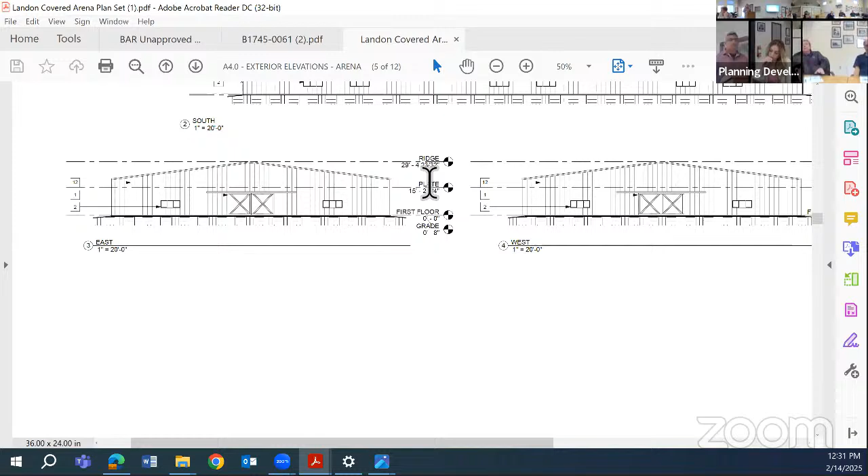Good catch. Okay, sorry, one more question. This is more than a covered arena because it's enclosed on all four sides, is that correct? Yeah. You wanna go to the floor plan? No, I was just gonna comment.

Huck and I did a covered arena, landscaped around a covered arena on Edison between 154 and town, and you can barely see it now. So I think you might have your client consider some landscaping around that.

Because this is really out there and a big flat plain. Do sequoias grow around this area? They do, but not native. Probably what you're gonna need.

I'd like to look at that when we're out there, because the property line to the west has some trees on it, and it is all pasture around it. And I did that arena on Edison. Yes, and you're right, it kind of has disappeared, it's amazing how hard it is to even see it.

Well, no, you cannot just build whatever you want, it's just like I told the solar panel on the earlier project today. Landscaping is considered ephemeral, so it's nice and can be very helpful in hiding a structure, but the structure has to stand on its own.

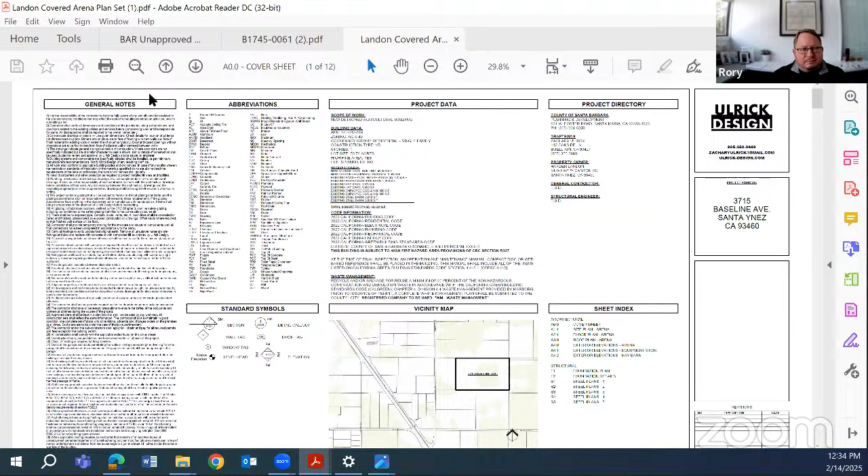Okay, any word from Rory? So our architect, I think, is in this meeting from 12 to 1, but I think we can go to it, and I don't know if Kendall can get on. Yeah, I can present on Rory's behalf.

Item number 4, 23 bar 00160, new single-family dwelling. And the comments from last time were: nice interpretation of the post and beam style, good siting, appreciate the pathways around the ADU. Consider that there's a tight turn into the small garage that may be inconvenient for the owner.

The proposed stonework is overly light. Use darker earth tones for the stone. Story poles will be required. The CBAR chair and a second CBAR member will visit the site. This sounds like one back.

I agree, I don't think those are the more recent comments. This was the post-site first visit. Yeah, after December, because in December we did a lighter different stone set. Right, as I was reading them, I thought something's not quite right.

Also, if I could - well, first of all, good afternoon everybody, thanks for hanging in there. I know it's past lunchtime and all things, so thank you for your perseverance through everything. I guess just for the record, I'm Angela James and I'm with Jones Lang Planning as well.

And I also did want to note that from when we heard in September into the December hearing, there was an adjustment to the building that maybe didn't get picked up because we were talking quite a bit about the siting of the structure itself and the skylining issue and all of those things.

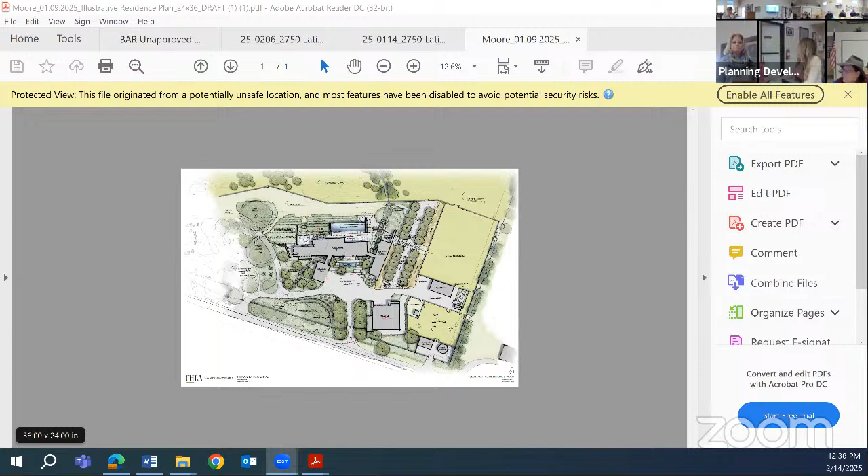I don't know, can you tell, Teresa, if he's on? Yes, he is online. Oh, so Adam, of course, can speak to that. Adam, do you want to speak to it?

It's not in that file. I found it, in the other one. Yep.

I think this would be helpful because it shows you different - right, the change that was made, thanks.

Adam, are you on? Did we lose him?

I'll message him and see if he's online. Okay, if you'd like to, there's a more clear diagram in the other file on page A101. Okay.

On this one? There should be an updated set of drawings. I don't know if I saw that updated set. We submitted to Adam last Friday, he confirmed on Monday that it had gone forward, so I was hoping that all happened. Well, I have 3 files: a letter, site plan options, and the illustrative one. That's all we have in our box. Okay, we should be able to move ahead with that.

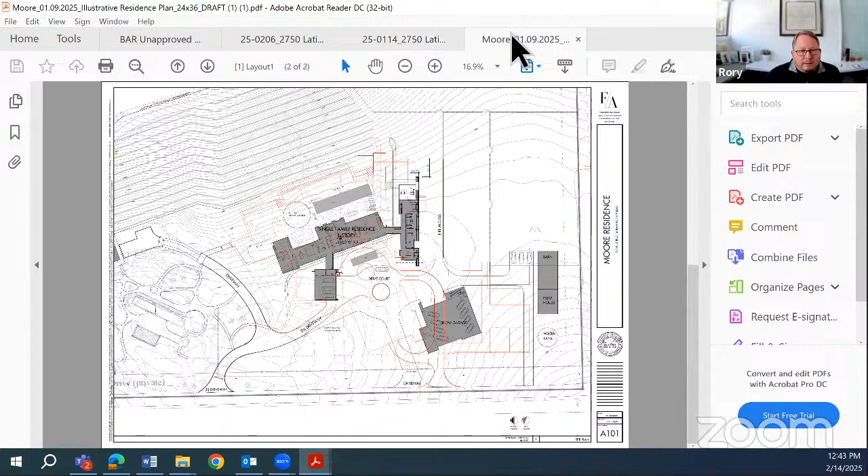Also, to address skylining, if you'll go to the illustrative site plan, the landscape plan, we were looking at including some native plantings, mid-height native plantings, to de-emphasize the structure at the top of the hill. And we've removed the vineyard portion from the project. What we found as we looked around the area is that the vineyards really emphasize the skylining, because that mid-height planting, in the long view, is gone - so all you get is low vineyard planting. We feel this will go a long way towards reducing that skylining effect.

And then maybe Kevin has more to add. Yeah, I could speak to that as well. We preserved and added trees to mitigate the skylining effect. We also found that further north on the page, there's a clump of trees at the bottom associated with a location of some water. We have kind of a poetic stormwater management idea for the water to be distributed to that area, so we thought we would add more trees along that course of water to continue the ribbon. Those trees will start to obfuscate the views from below, or screen the house from below more effectively.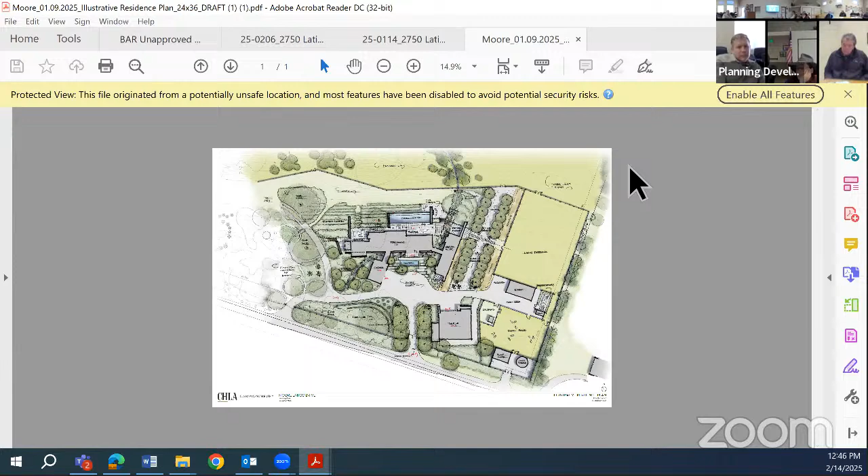Can we go to the site plan, the comparison one? If you flip back and forth, have you settled on one of these? Yeah, the one that creates the courtyard around the oak tree. That's what we wanted.

All right, do we have Adam yet? Let's see. We're still having issues. Adam, is your microphone still not working? His microphone's still not working. Working on it. Okay Adam, do you want to call my cell phone and I'll put you on speaker? Or use the cell phone? Yes, he does. Technology is your friend until it all of a sudden isn't. And then it's really not. 90% of the time it's out.

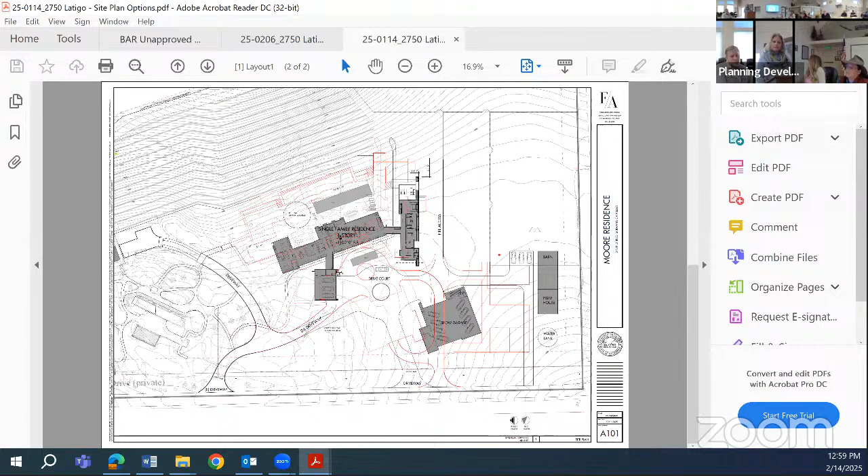So, the landscape and that sketch drawing, I think, is indicative of the direction we went. It's just full architecture was in that additional plan.

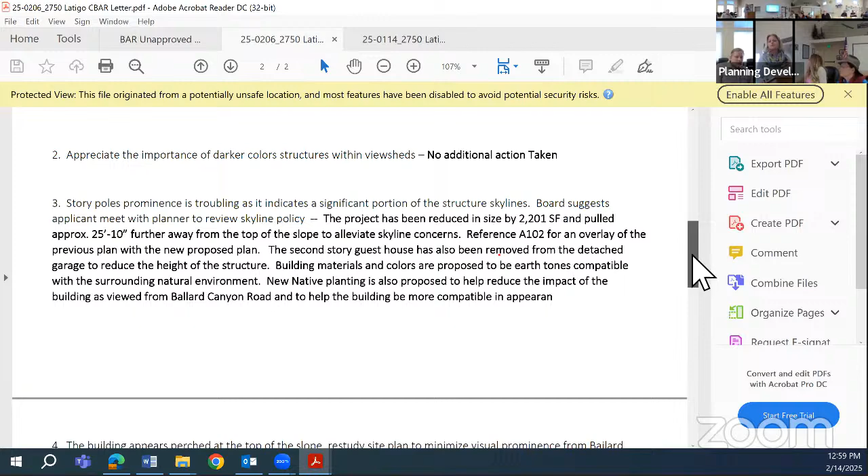Did you want to go through and quickly talk about it as part of your presentation? I think we hit most of the CBAR comments in the letter. Kendall, I don't know if Rory is available now, if he had any color or commentary he wanted to add. He hasn't made it back yet, but I don't know that there was much more additionally. I know we're trying to move the project into preliminary review, so that once it's sited, we can pin down more of the finer detail points. We're hoping there's enough in this round to move to preliminary review.

I think the key is that we listened and worked really hard to preserve trees, add trees, add to the context of the area, and move the house to mitigate that skylining issue.

Okay, but we have no public comment? No, we do not have any public comment. I think we covered all of our questions. I thought we did, yeah. Okay, but obviously whatever it is, we're happy to. Okay, board comments?

Oh, that shut him up. I wasn't present at the site visit. That's nice cover, yeah. My question - do you have anything to say? I mean, just based on the limited amount of what we've got.

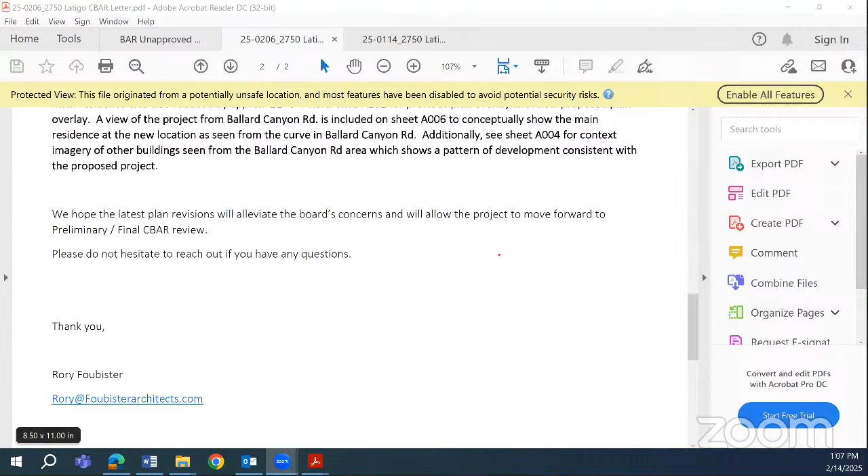As far as the finding of whether the skyline criteria is an issue, we feel pretty confident that it's not, and we can make that finding based on the new location being set back from what was originally proposed. Didn't you say that was uploaded? That's something that Adam gets - I got a confirmation from Adam that he received what I sent, but then he's the one who has to send it into the hearing.

So Adam, I think you heard from staff that it had been received. Yes, okay, but it's nobody's fault, it's a technological issue. How about we blame it on me then, okay? I'm comfortable not even assigning blame at this point. I think we're moving forward in a positive direction, wrapping it up and going for final. It's totally great. Yeah, everybody's getting hangry.

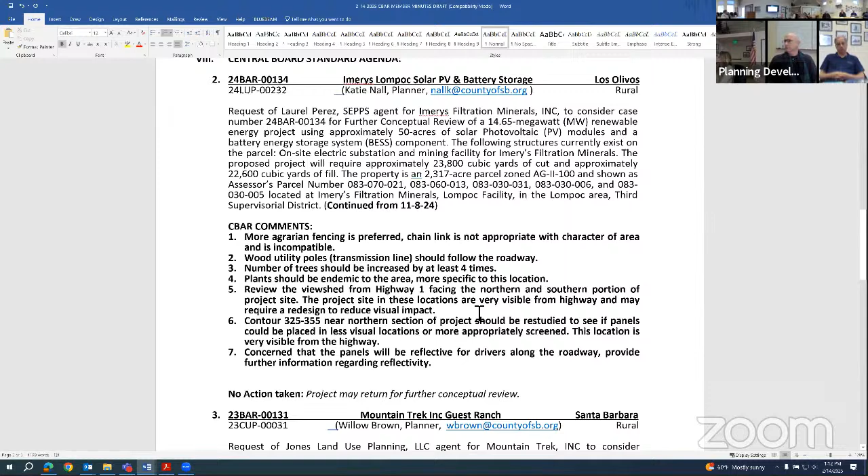And what we're trying to get at there is that there are locations - review the view shed from Highway 1 in north and southbound directions. Could you enlarge that, please? Yes.

How's that look? We're doing it on our end, don't worry about it. Okay, so could you kind of just type as... are you done? Because I'm not sure we're getting what he's doing. So review the view shed from Highway 1 in both north and southbound directions.

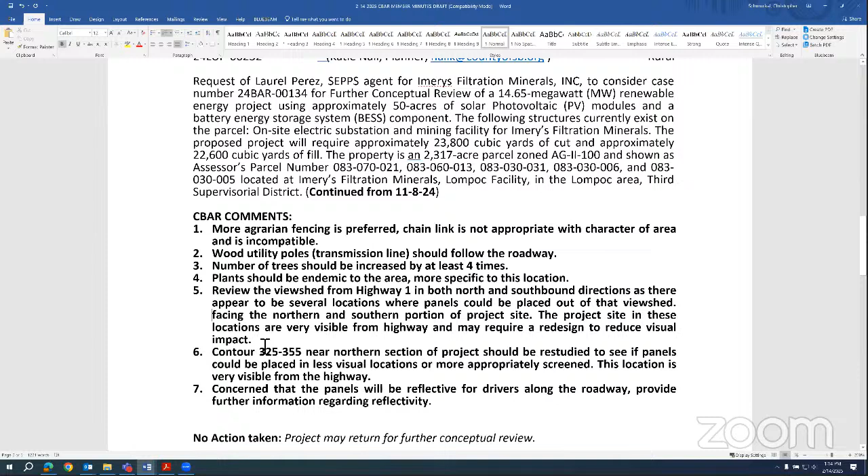As there appear to be several locations where panels could be placed out of that view shed, and then reduce - specifically between contours 325 and 355, and on the other side of the creek, between the creek and the wetland and the oaks.

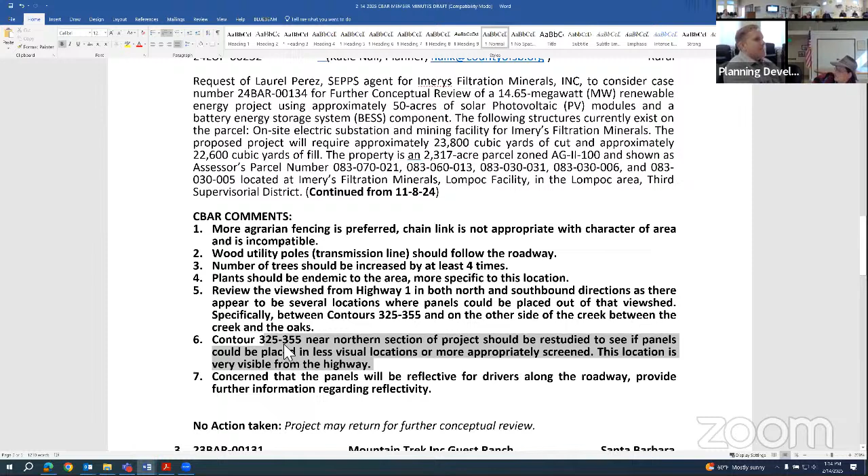And I think that takes care of all of that comment, so you can get rid of everything else, like number 6, yeah we can get rid of that. Delete number 6 too. Number 6 could then be - between the, yeah delete number 6, and then after the oaks we can say this will allow removal of more visible panels.

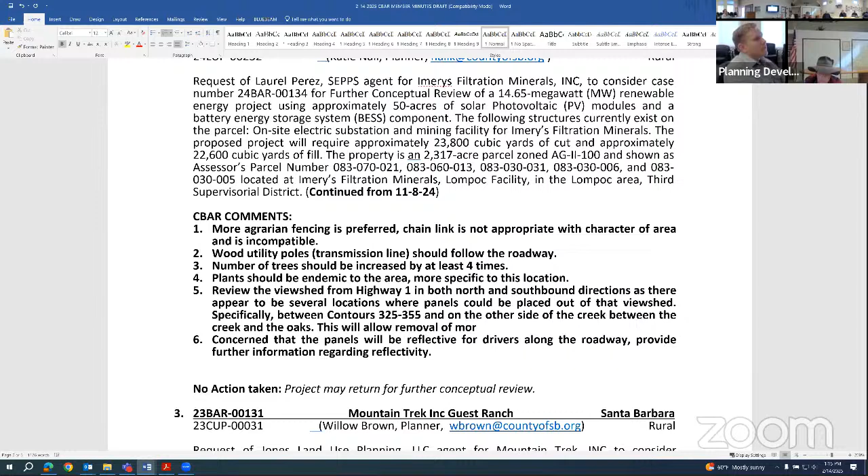Because that's closing the loop - I forgot to get back to the whole point of it. Removal of more, or relocation? Relocation, yeah it would be relocation. Will allow relocation of more visible panels.

Okay, does that look good? Yeah. Okey-dokey, item number 3.

For the first point, they need to show the existing grade, especially where modified, and then show a projection or line that's 16 feet above that. Not the projection of the height limit, but a projection of the existing grade, 16 feet above ground plane.

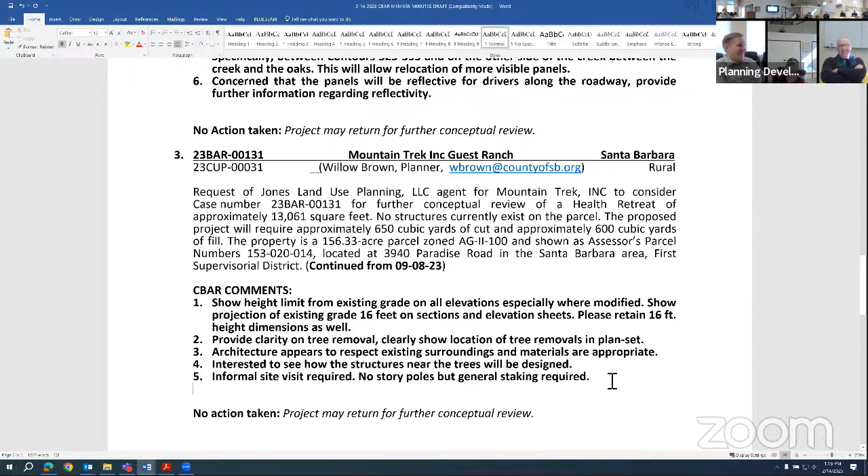Nice job, by the way, on the minutes, it's not the easiest task in the world. Thanks. Item number 4, I just had the 1.

Let's see, how do we normally do that? Do we usually document my warning about the preliminary final? Not usually. Okay, no. That's the site plan option that addresses the skylining issue, was chosen and is appropriate. You could just say, and is appropriate, I guess.

I also think we need to include something here that the information in the box is empty, to give people in the future, when they look at this, a reason for why it's coming back the way it is. If you want to say there were technical issues with drawing submittal, we can put that in there. We don't usually point fingers. I'm not pointing fingers, but somebody might think that, and my consideration is it's coming back in a non-normal, or non-standard way.

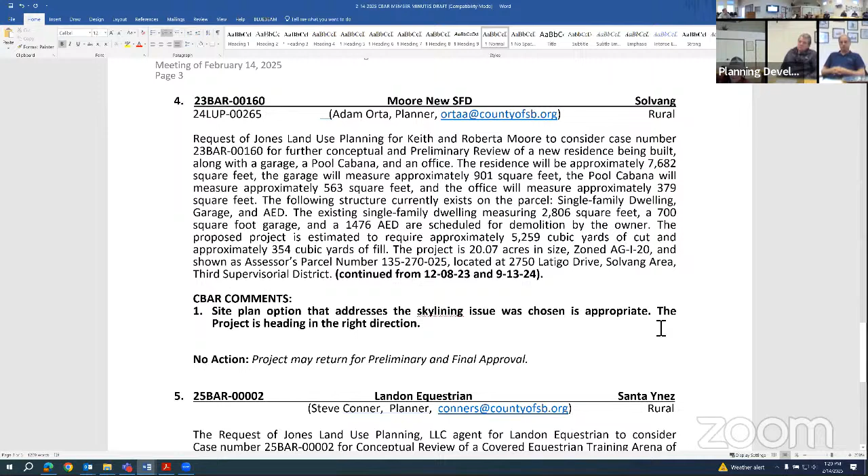And I think, however you want to word it. How about this, we need to put something in there to explain how that's happening. How about we put a second note in there that says, please refer to notes from December hearing for further comments. That seems reasonable.

Not all drawings were available for review. Because you wouldn't want somebody else to come in that has done everything correctly and then try to goose the thing forward citing this.

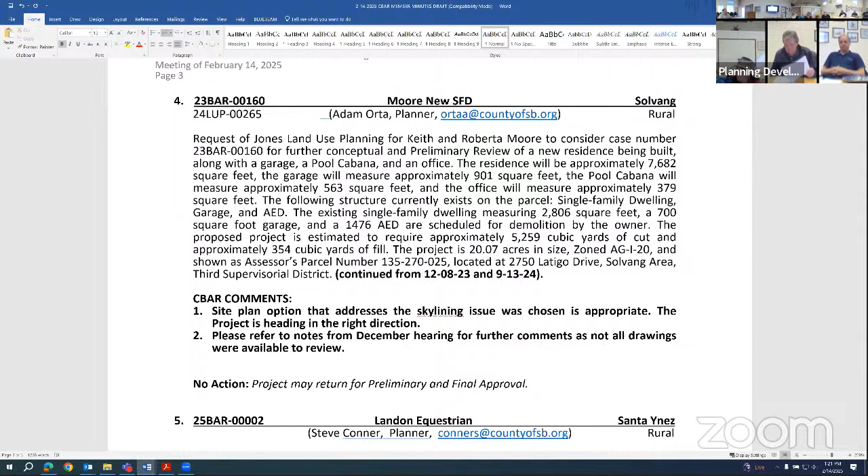So there we go. Could you include the December comments, both of them, when we get them, so we have both comments? Okay, 5, I think there's one more, this is the last one. Yep.

Story pole, number 2, story pole each end of the peak of the roof, and stake corners. They're going to ground stake the corners of the building for site visit.